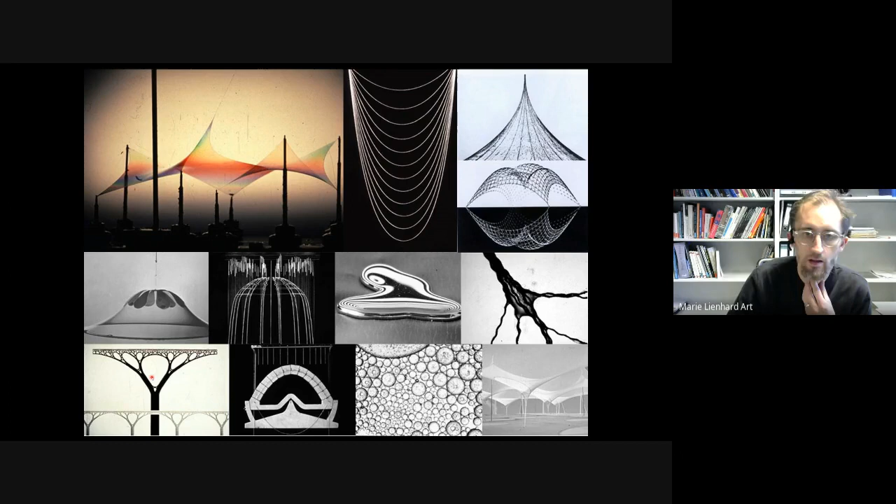And then the fourth subject is that of shells, and then predominantly grid shells, which they were studying. And that's, I guess, something that you guys will be looking at quite intensely. So I will actually also talk about these four fields. I will talk a little bit about membrane structures, pneumatic systems, the branch systems, and at the end, I will keep it quite short with an outlook into the grid shells, because I guess there you have much better experts than myself at hand with Enrique, so I don't need to talk too much about that.

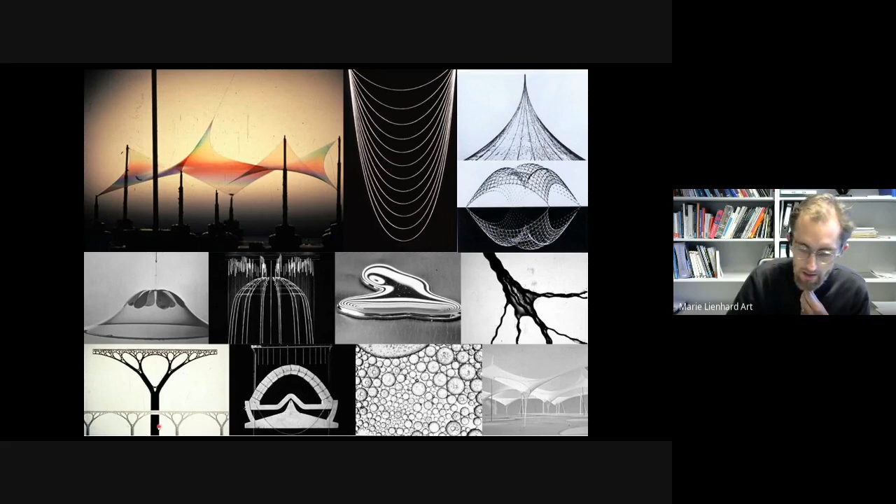So let's look into membrane structures. When you see the image of Montreal, of that World Exhibition Pavilion, or when you see the Olympic Stadium of Munich, a lot of people said, oh, they were probably looking into nature and then translated, for example, spider nets into something architectural. And to Frei Otto, it was always very important to point out that they didn't actually mimic spider nets, but it's because they built Montreal and Munich that biologists approached them and said, you seem to have a very good understanding about these kind of systems. Can you explain to us how spider webs work?

So there's this obvious link. You look at these systems and then you look at an image of Montreal and you think, wow, they've just built a spider web. But this system that they built in Montreal and these cable nets came out of a totally different idea, and it just happened to look similar. And when you look at it in a bit more detail, you also realize that in the way these spider webs are built, they are actually quite different to these cable nets. But there seems to be this link.

Because the spider web is also a pre-stressed system that's tensioned under its own weight or pre-stressed during construction when the spider is making the web, and it's hanging under dead load and turning into a kind of surface structure, you see some properties of this net which we recognize from tensile membrane structures. You see this double curvature. You see that it's becoming a lot more dense around these local points, something to do with the concentration of forces. And I guess through trial and error and too many meshes breaking, the spiders have learned to make their nets a little bit more dense around these areas.

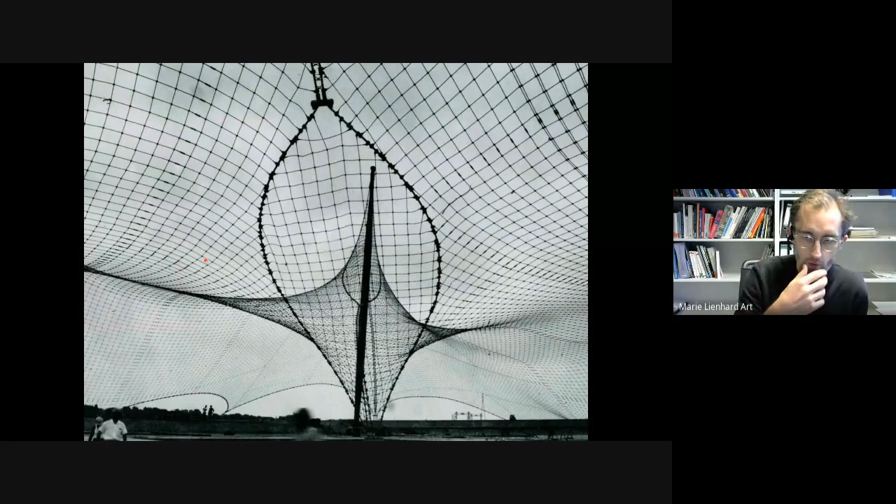And it was actually in this dialogue that they started then working more and more with people from other disciplines. And in later large research projects, they got funding for architects, engineers, and biologists. So they could work in this world of biomimicry or bionics and actually address their work at these translations between natural phenomena, which you find in plants and animals, and then translating that into something technical.

Now, if you look at textiles as a material that we can use to build envelopes, you could say, well, we have a thousands of years old history. Some of that history of building these tents has lasted until very recently, which you find in North America and North Europe. And some of it we can date back to the time when most of the people on our planet were nomads, and then they would build these very light systems.

Where in that case, they would take a structure out of timber, just cross-connecting something they could find anywhere in nature, and then cladding it with textiles. In the beginning, that would have been animal skins, and later it would develop into woven textiles.

And we see in other regions of this world that the primary structure, so the timber that they need to build these, would become more rare. So in the northern tundra or in areas in the northern European or North American forests, you would have timber as an almost endless resource. Whereas in the more desert areas in North Africa, timber is actually something that's very scarce.

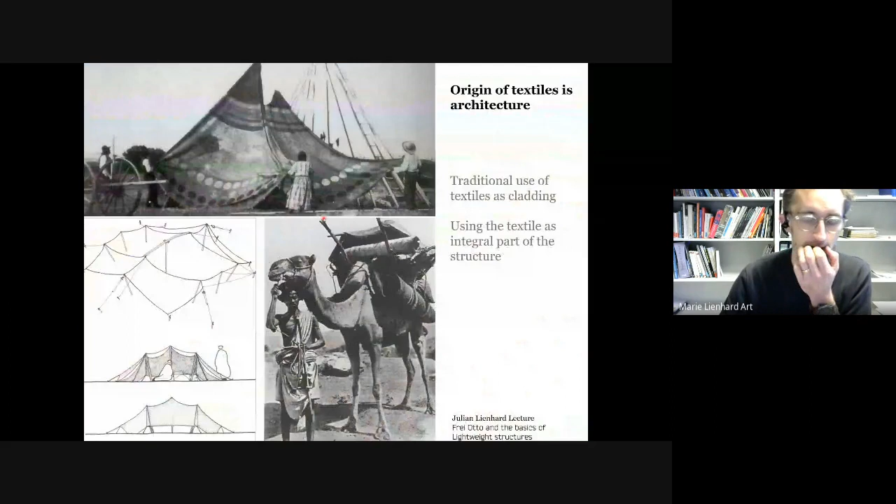And immediately you also see in these drawings that we see some curvature appearing on the surface. So the people making these drawings, they were not architects or engineers trying to explain something about curvature, but you also see it in this image just through observation. When they start tensioning these skins, then there's some curvature that appears. And this is actually a very central part, and this is kind of the first observation that then leads to the work of Frei Otto and this idea of building something structural out of a textile material.

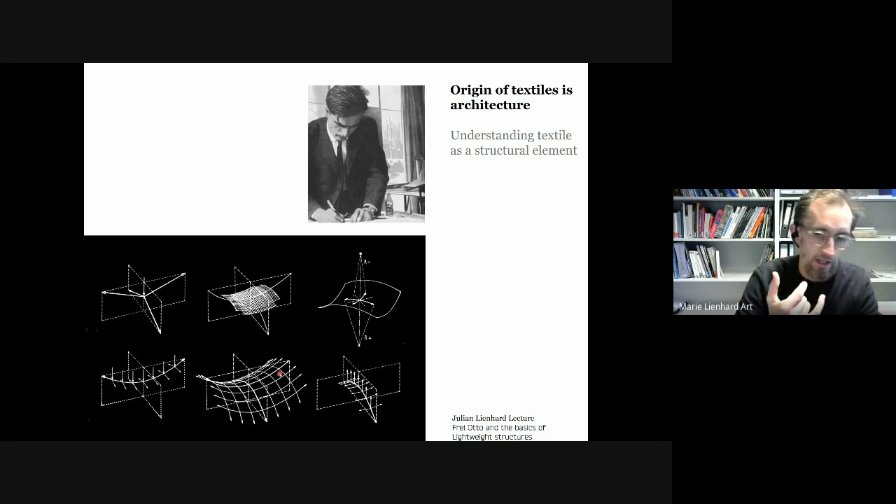And we will actually now just take a few minutes to focus in on this a little bit more, because, as Enrique said, it's these very simple and basic pieces of understanding about forces and form which totally open up a world for you to understand how you can design creatively with these kind of systems. So I'll be looking into these graphics in a bit more detail.

Before then, I want to just put in from the side, and early on I could only find the German graph to it, but I'll quickly translate it for you. I put in from the side something that was historically super important. And that is that at the same time as Frei Otto was developing this understanding about how tensile membrane structures could work, or how tensile systems work themselves, the petrochemical industry at that time was developing new materials.

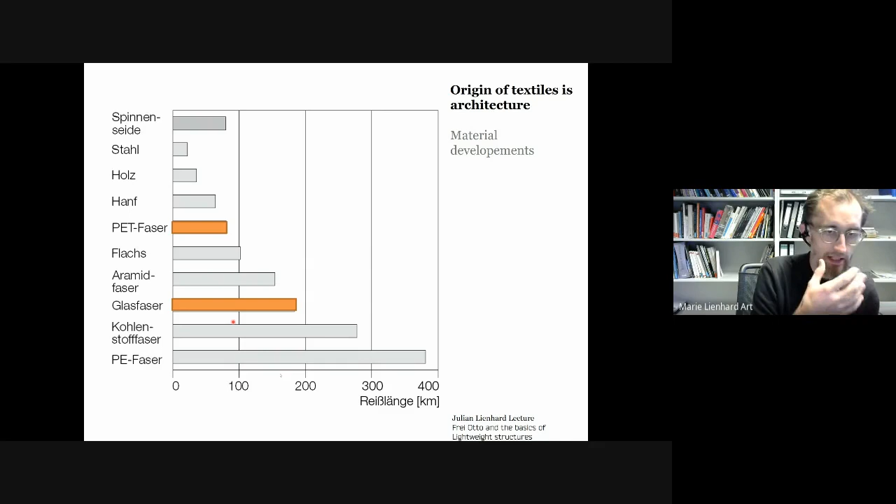And in the beginning, we know the early explorations of Frei Otto, the membranes were predominantly built out of cotton, and then some mixed cotton and PET fibers. And there, the strength of the material is very limited. And it's only because of PET being developed further and then eventually glass fibers as a material that he could source as a membrane material, that he could suddenly get into this world of these large span tensile structures. Without this material development, which just coincidentally happened at the same time, it would have been impossible to push the boundary in the way he did.

And he himself developed a lot of ways of looking at material and their properties. And the one thing that was first suggested at the IL is the so-called rip length. And with this rip length, they were studying materials, and they were always putting the weight of the material against the strength.

So you have a material that has a weight. I'm just going to take my pen here. You could say you have a weight of a material that's given with, for example, take timber, maybe 5 kilonewton per cubic meter. And then timber would maybe have a strength, just as a normal typical timber that you could buy, that's not a high-ranking glulam, it would maybe be 1.5 kilonewton per square centimeter.

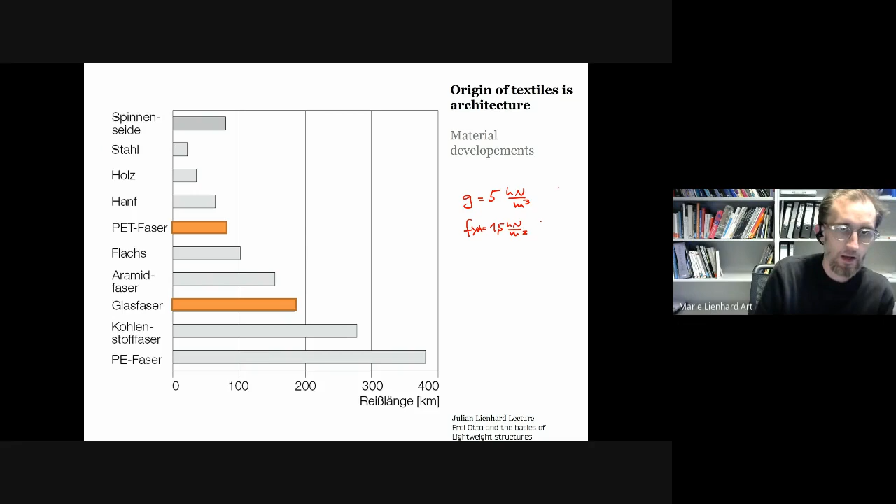And now if you compare these two numbers about how strong is it and how much does it weigh, you can just imagine an endlessly high tower, and then you hang a steel fiber on that tower, and you hang a timber fiber on that tower, and then you hang different kinds of fibers on that tower. And then you actually see that steel has a shorter rip length than timber, for example. Even though steel is 10 times stronger, it's also 100 times more heavy.

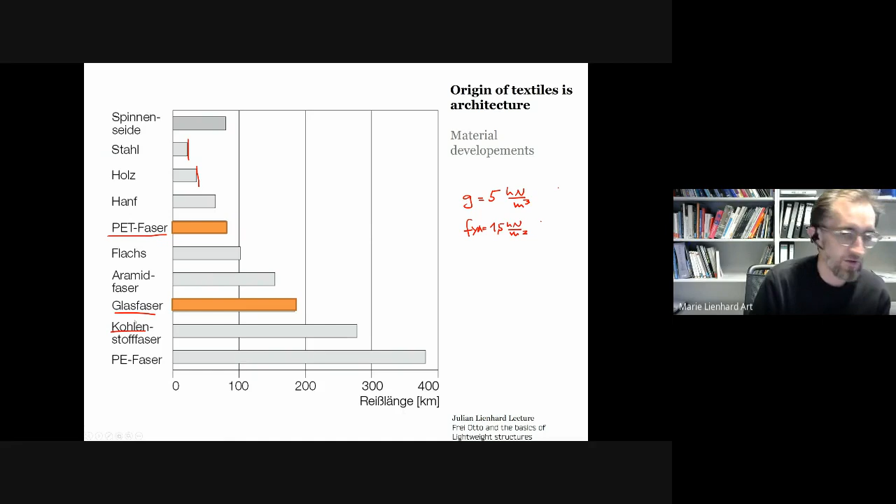So in that case, it would then rip much sooner. And then you can see that there's some materials like the PET fiber, they combine high strength and low weight. And especially then if you go, this would be carbon fiber and glass fiber, there you suddenly have a material in hand which is super light and has an extremely high tensile strength. And this is essential because if you look at a membrane, you need to combine a lot of properties. So you can even start thinking about building something out of a textile that spans over 20, 30 meters.

So now we talked about we need a high strength. We need a high elongation at rupture. So carbon fibers, they almost have no stretch and then they suddenly break. Whereas glass fibers and PET fibers, they have a bit of stretch in them before they break. And it was also an important property, just like if you have a stretch shirt that you're wearing, that if they would build these membranes, they would produce them too small so they can stretch them into shape, and that gives them their stability. So fibers that are super stiff also wouldn't have worked.

And then it really comes down to these two fibers which can be used because they combine high strength, low weight, also with a low stiffness. And then there's actually very few materials left that have a very high strength and a very low stiffness. And in that, you then get enough stretch out of the material so you can really pre-stress it.

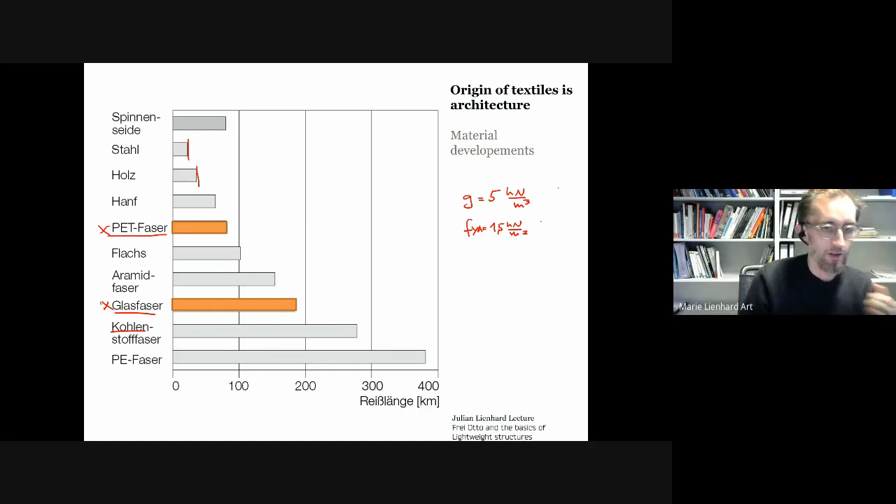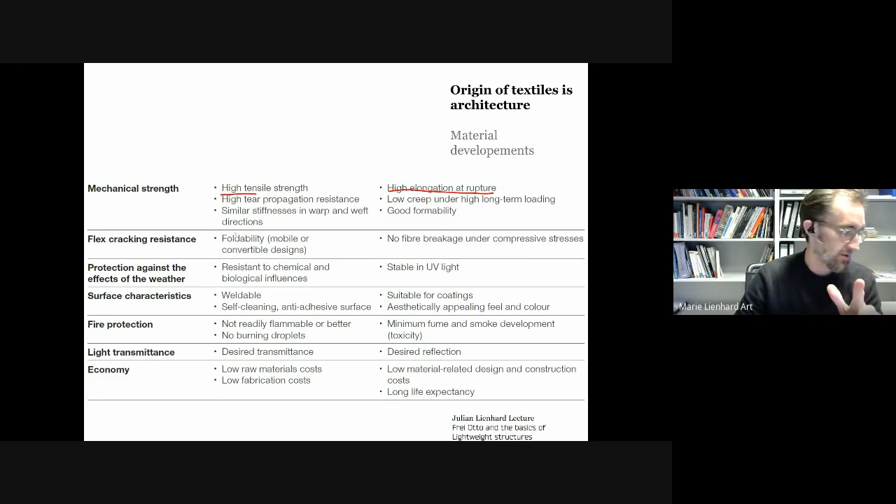Of course, UV stability is important, resistance against water. Fire protection has to be considered. It at least mustn't melt and drip down as kind of molten plastic on the people. So then there's a lot of other properties which also X out a lot of the other material options. And so you can see that actually out of the abundance of material developments that are always happening, still to today, there's only two, three fibers which are left, which we can use for these applications.

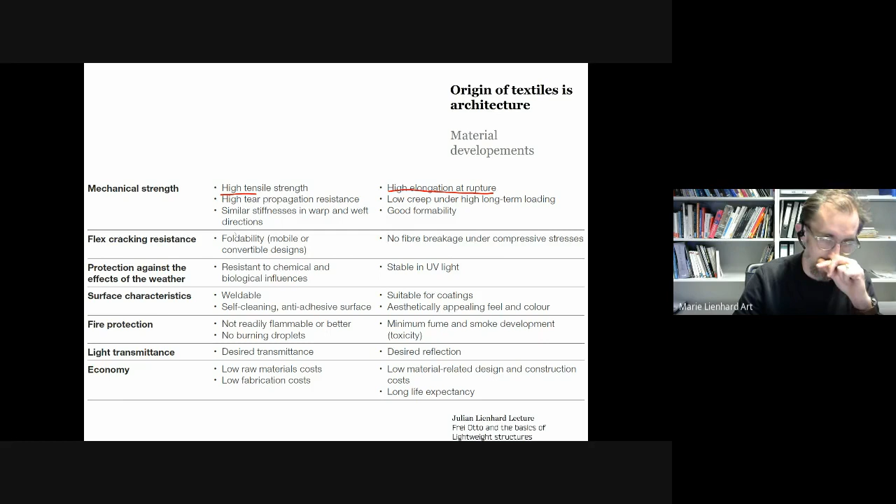And they were all three of them, PET, glass fiber, and then PTFE. Those three fibers were predominantly developed just at the time in the 60s, 70s, when Frei Otto was starting to build these roofs. So that's kind of the small sidekick, that it's not only him pushing the agenda, but it's also coinciding with the material developments that the petrochemical industry were doing at the time.

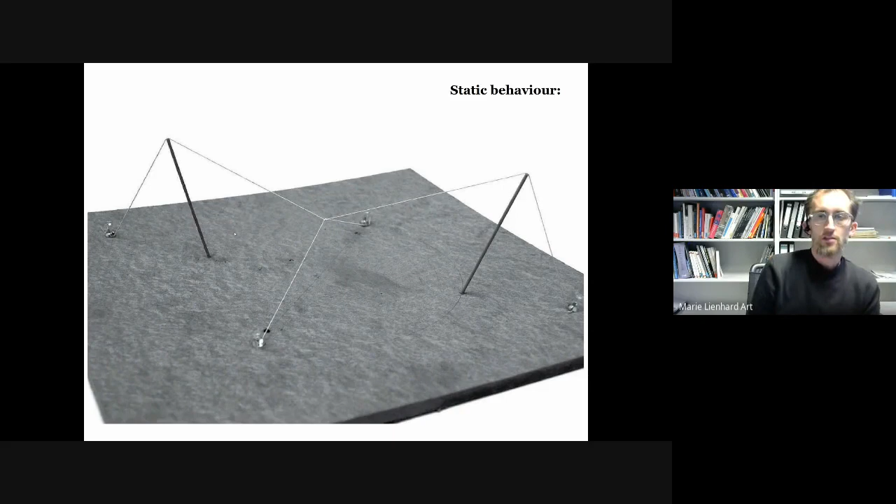So now let's go back and look at this principle in the way Frei Otto explains how forces work in this system. And he explained it in a very simple model. You saw the drawings earlier on where he said, I can take two fibers that are crossing each other. You could imagine in his sail that he was building a really large membrane roof. And you have the two crossing directions inside it. And you could focus into it and say, I'm building a model just of two fibers crossing each other within my membrane structures.

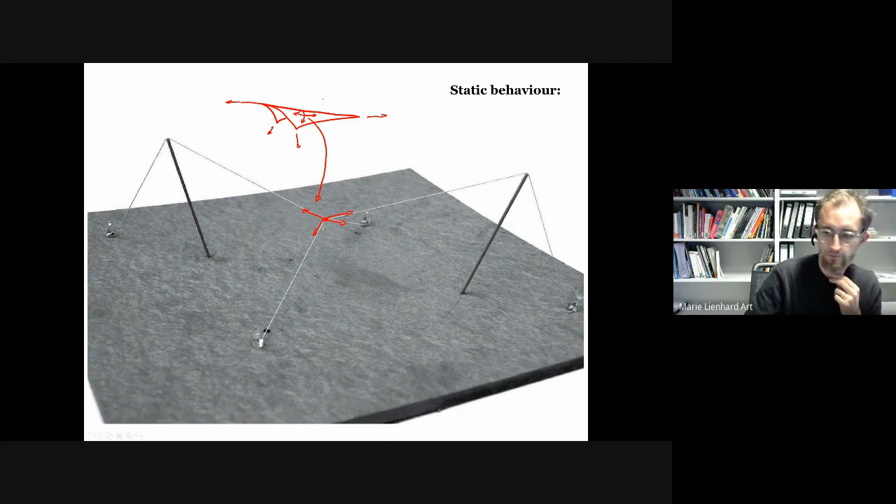Or if you want to imagine it a bit larger, this could be a cable net, for example. And as I'm tensioning this net or this membrane from the four corners, I'm putting tension into the surface. And now I want to observe what's happening inside the surface. So you could build a model just by hanging a string, crossing it with another string. And then you can observe that you can pull down and you can pull up. And there's always one of the strings which becomes active as you pull on it. And it's because of this crossing string behavior that we actually now have a structural system built out of materials that can only take tension forces, yet it's stable against loads from any kind of directions.

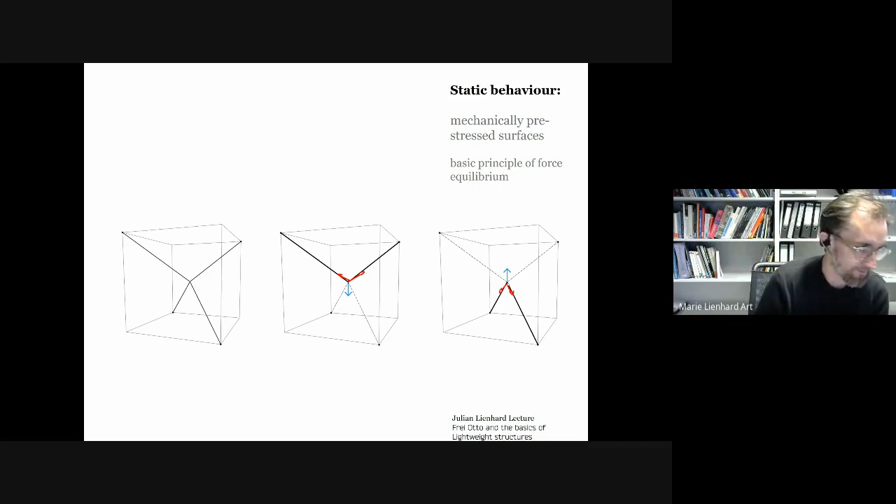And as you see it now, I'm sure for most of you, it should be super logical when you explain it like this. And this was actually the great talent that they had, that they could really break it down into super simple, very physical explanations. And then when you understand this, you can scale back out into the complex systems, and you always have that in the back of your head. We could focus into it a little bit more and now look at the way you can explain the same thing through graphic statics.

I'm sure I have a kind of mix of architects and maybe some engineers. Maybe some of you have never heard about graphic statics. Maybe others had to go through it in university for many semesters. So I'll try and explain it very simply. For some of you, it may be a bit fast. For others, it may be a bit slow. So let's just take a second and really understand what they were proposing here.

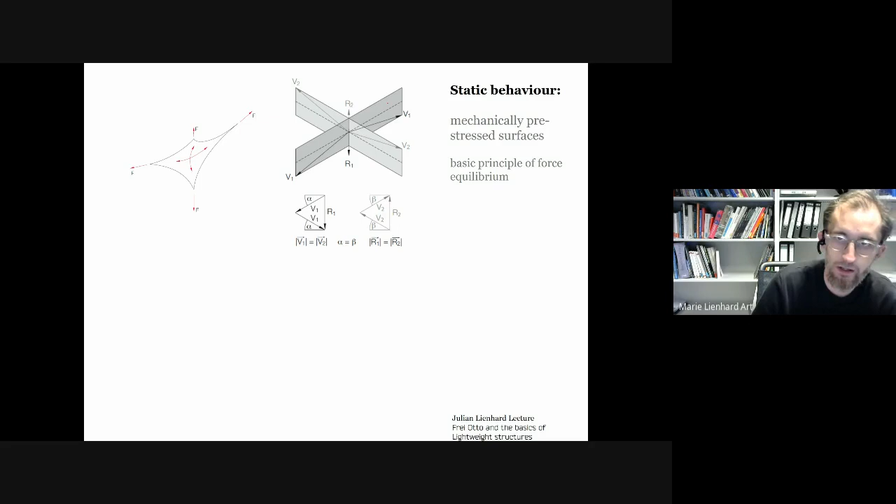So we again have these crossing fibers of the membrane. And what I'm doing here now, I'm putting these two gray surfaces in it so you can just read it a little bit better. So really, these are the two fibers that are crossing each other. There's one which we call the standing fiber. That's the one I was just drawing. And then there's the hanging fiber, which is this one.

And then you can say in any system, we have equilibrium if the addition of all the forces that you can write into the system add up to zero. That's Newton's third axiom, that actio equals reactio, so that all the forces on the system outbalance each other. And in graphic statics, what you can do is you can find the resultant force of force vectors.

And so the theory that we need to find now is that the reaction force pulling up from this one cable, maybe I'll actually quickly change the color so it just becomes a little bit clearer, against the other force pulling down, that these two forces, if we add them up, need to add up to zero. And this you can do by just checking if you look at the force as a vector.

So we now look at the force inside that cable or inside that fiber within the membrane, we can draw it. The direction of this arrow is given by that angle, and the length of that arrow is given by the force. Then we take these two forces and we add them. In graphic statics, you always add the forces head to tail, and then you can close the force diagram, and that's what gives you the resultant force. Then you do the same in the other direction.

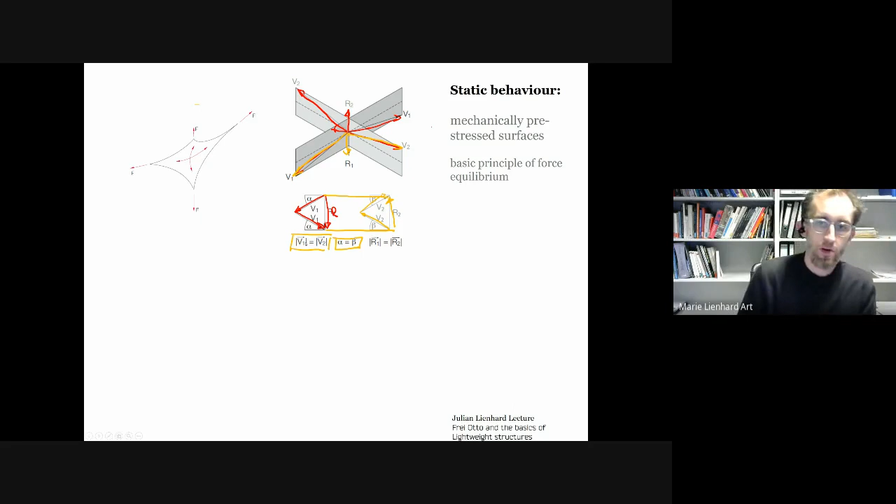And if you look carefully at this drawing, this was only true because I was drawing it in a way that the lengths of the vectors 1 and 2 were the same, and the angles at which I was drawing it were also the same. So now you could ask yourself, what would actually happen if I pull on the one string a bit more than I pull on the other? I guess I could still find equilibrium. And this is what this next drawing would show you.

You now say, well, right now I want to pull more in the direction of the vector v2. Well, I'm just going to switch to the laser pointer. Might make it a bit easier. So now I'm pulling harder on this string in the v2 direction than I'm pulling in the v1 direction. And because I'm pulling harder on it, I can represent this by an arrow which I draw longer. Because in graphic statics, the length of the vector represents the force.

And then through observation, I could build this out of rubber bands, and I would immediately see, all right, this point has also moved up. That's what we would intuitively say anyway, right? If you have these two crossing fibers and we pull more in one direction, then obviously it would pull up higher.

And then if you put that back into graphic statics, now v1 is smaller than v2, but at the same time, we've changed the angle, so alpha is bigger than beta. And it's because of these two things changing at the same time that the two resultant vectors are still of the same size and in opposite direction. So we still have equilibrium.

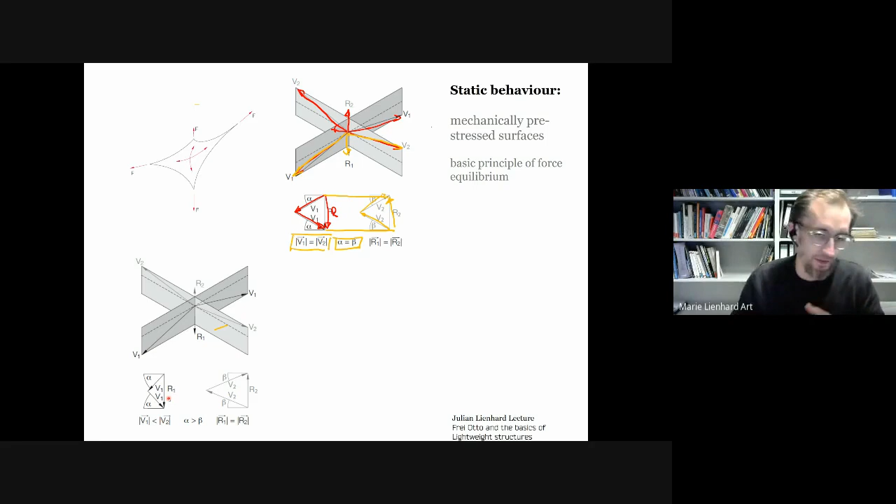And what I was just saying here is that geometry is connected to forces, and that I cannot change the one without the other. And if you can understand this, then you understand the entire work of what Frei Otto and the whole lightweight movement was heading for: they were looking at systems where, through change of the forces, you influence the geometry, and if you change the geometry, you will get an effect in the forces. And this is basically, in terms of graphic statics, with this super simple explanation, what's explained here.

And then finally, you can say, well, if I now have external loads, then you can also see that an external load would lead to a deformation of the system. That again would change the angles. And then the resultant vector R1 would reduce so much until F plus R1 again equal R2. So the resultant vector in the opposite direction catches not the entire force. So R2 doesn't have to stand against the entire force of F1, but R1, which points in the same direction, actually helps virtually carrying this load, which is kind of strange, right?

Because we just said in the system, it's always the hanging direction carrying the loads that are working vertically downwards, and it's the standing direction that carries the loads working vertically upwards. But in this graph, they could see that actually if I pre-tension the system, then into an element that can only take tension forces I can add some compression force, and it will carry that until it's lost its entire pre-stress.

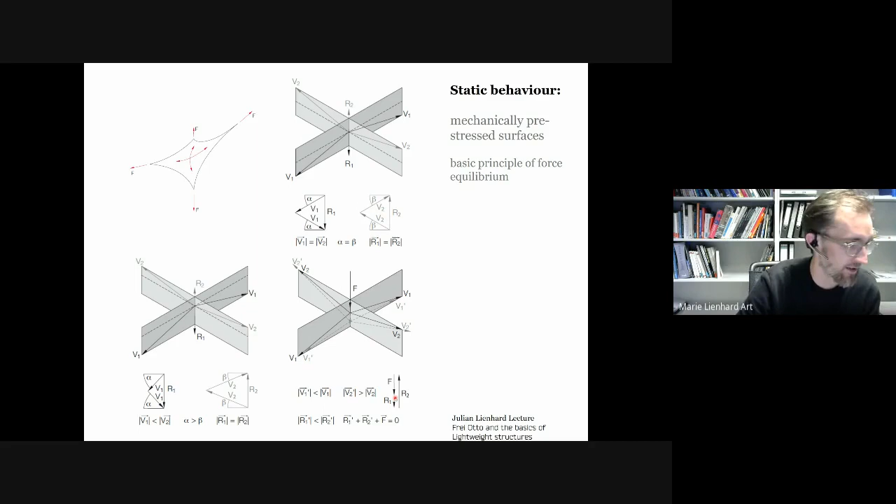So again, with just a basic argument, they could develop a theory around this to understand how pre-stress systems, by pre-tensioning them, would become stable against any external loads. And that's what's needed to explain why this would be standing. Now, this is why in 1955, Otto and his team could build this roof and be 100% sure that there can be any wind, any snow from any direction, and this thing will never fail.

Okay, so that's the first fun theory that I can share about Frei Otto, and that's kind of the starting point, how we got into this whole thing. If we just go back one, maybe here. So if we can understand this was his first theory, then we understand that we can build something that's structurally sound, so stable against external forces from any direction, out of a material that can only take tension. And we can see that force and geometry are inseparable in these systems. You cannot talk about force without talking about geometry.

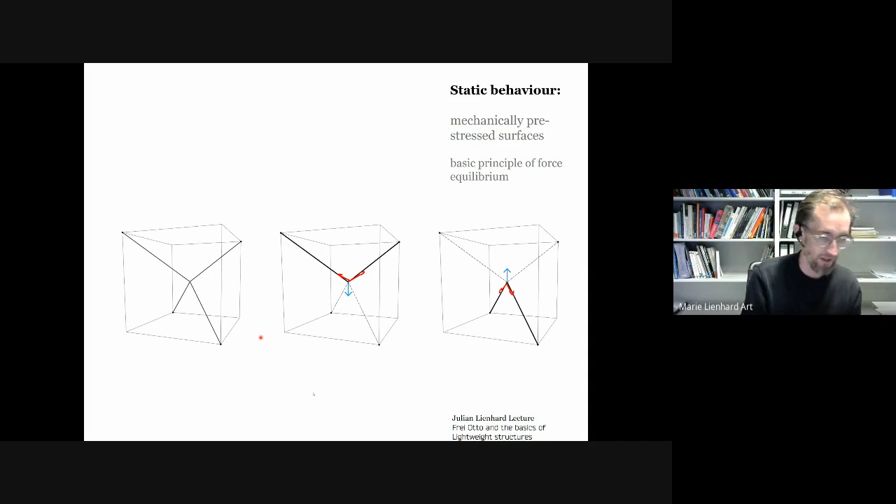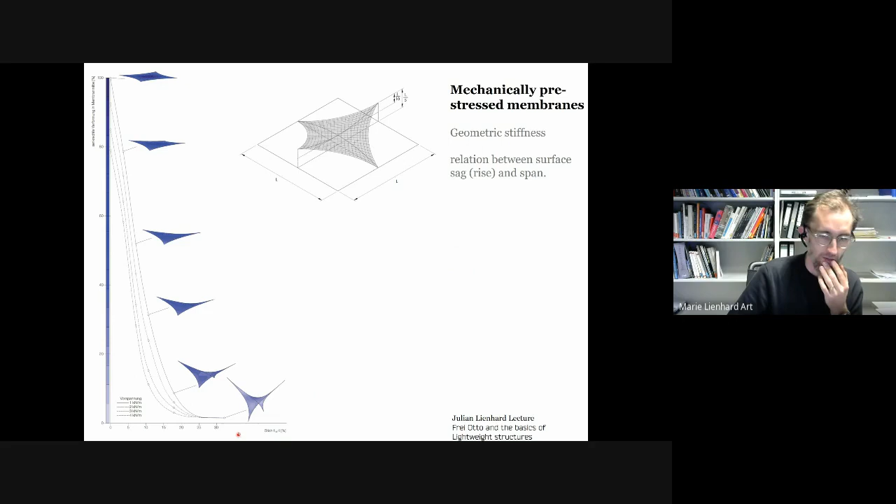I will jump over this, and basically these graphs, I will share this presentation later, they just talk about the importance of curvature and increasing curvature in these systems. If you have these two crossing fiber directions and you translate that back into the surface, we are then talking about double curvature. And then you can see how the double curvature influences the amount of deformation that you get in a system. So a totally flat sail, which you see at the top, would have 100% deformation. Then a highly double curved one would gradually reduce the deformation. And by this curve being nonlinear, you can also see that there's a kind of sweet spot in how much curvature you need to add into the system.

So with this theoretical understanding, they would apply that then to model building and try to develop shapes through these form finding models that they would build. And an important method to build these form finding models was that of using soap film. And that again is something that can be argued very logically, why you would use soap film to develop a membrane system. So just now we were talking about force equilibria.

And this is a totally different argument where they say, well, let's try and find a way of experimentally developing these surfaces. And the property of soap film is that it has a surface tension and thereby is self-contracting. As an image, you could always imagine it's always trying to be as thick as possible. So as it's contracting and gathering material to reach maximum thickness, it can do this only by minimizing the amount of surface area. You need to take this material from somewhere, right?

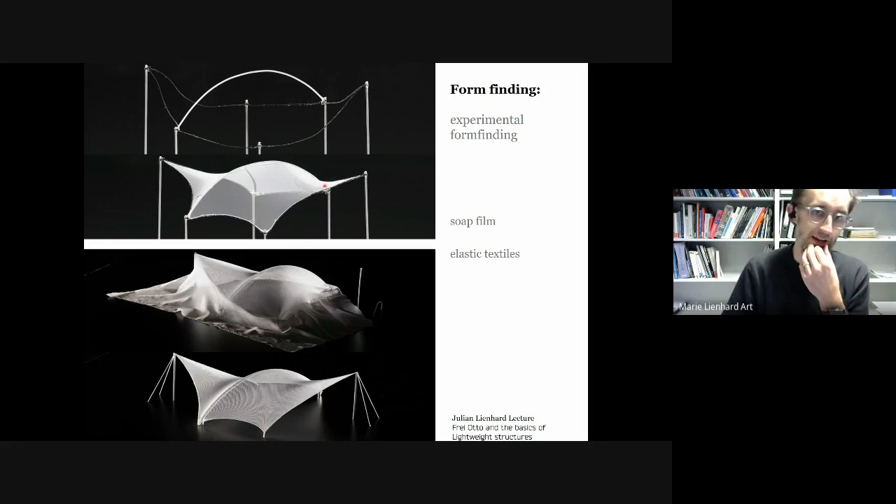So the argument is I'm using a material that's self-contracting, thereby maximizing its thickness and minimizing its surface area. The result, what we get, is that we form find the minimal surface. I'm sure that's something that you've heard. Minimal surface is basically just that surface with the smallest amount of surface area between the given boundary conditions.

So if this is my boundary condition of the arch, and then I have some edge cables, I could draw any surface in between here. I could draw some kind of shell surface. I could even draw something that's undulating or whatever you want. And all of these would be viable surfaces within these boundary conditions. And there's only one surface which has the minimum surface area.

And this is actually an excellent argument for a membrane structure for two reasons. First of all, the idea was to work with the least amount of material, lightweight structures. So we might as well build the smallest surface that we can build. Right? If there's a theory for it, that we can find the minimal surface, let's do that. That's the smallest amount of material that I can use to cover something.

But there's also a really good structural reason, and that's always something that Frei Otto would argue for. And that is that if I build the smallest possible surface, then any external load can only lead to tension. Because if you visualize that for a minute, any external load will obviously lead to some kind of deformation of the surface. And then that deformed surface is still one of the surfaces that you can describe between the boundary conditions. But there's only one minimal surface. So any other surface that gets generated through deformation must be bigger.

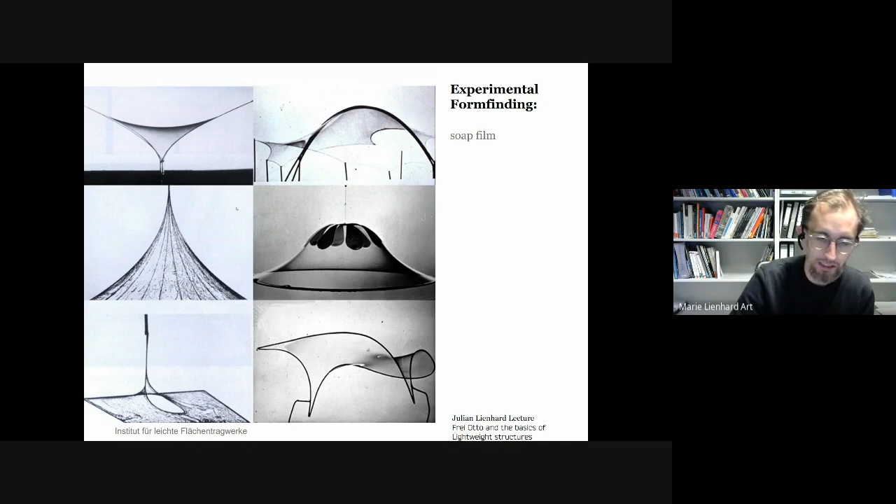And it's because of this that they then started building all these different model building tools so they could build surfaces out of soap film. They built this amazing machine. And inside this machine, they would build all these membrane structures, dip it in soap. There was a high humidity within this machine and a glass in front of which they could take photos of their membrane structures. And then they would measure the coordinates on these photos so they could then get a geometrical understanding that's reproducible of these kind of surfaces.

And still today, some of the form finding tools reference this and say it's the soap film method. And there's big debates in the industry whether that's actually the best membrane surface or not. There's some companies which say, well, these minimal surfaces, they have the property that they become very flat around the corners or in the center. And that's why it's maybe not such a good idea to build them.

But this comes from Frei Otto's philosophy, this comes out of the idea of finding the minimal. He would always only try and find ways to build these minimal surfaces, and then to control the geometry within these surfaces, he would add additional cables to it. These so-called ridge or valley cables. And then with these ridge or valley cables, he could then make the surface into smaller zones, and that would then again control against something being too flat.

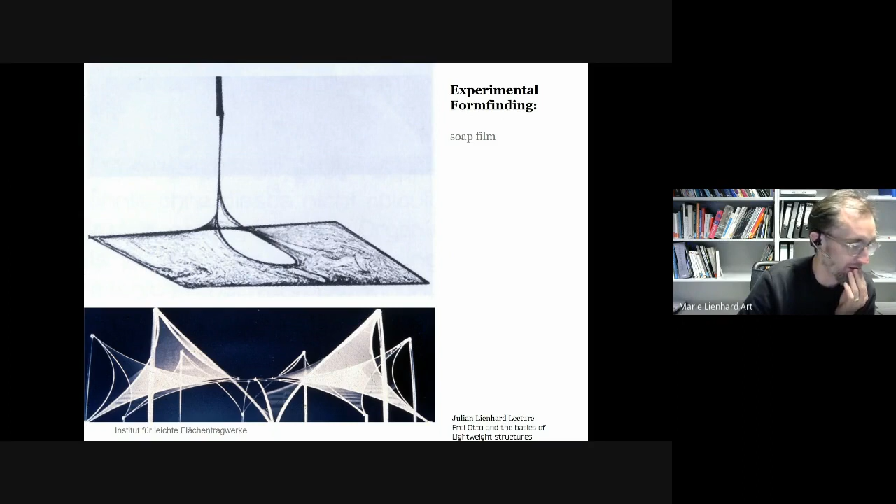And actually in the Stuttgart area, there's some offices which only work with this method. And then there's other offices which will never work with this method and always work with tension that differs in the two directions. And then they have big arguments at some of the conferences and try and find out what's better or what's worse. It's quite interesting that still today there seems to be a debate about it.

Quick excursion to the side. We talked about minimal surfaces. The property of a minimal surface is that the mean curvature is, if you measure it, that the radii are the same in the two opposite directions, which leads back to that argument. If the two radii are the same in opposite direction, then it leads back to the same argument as we were doing with graphic statics earlier on.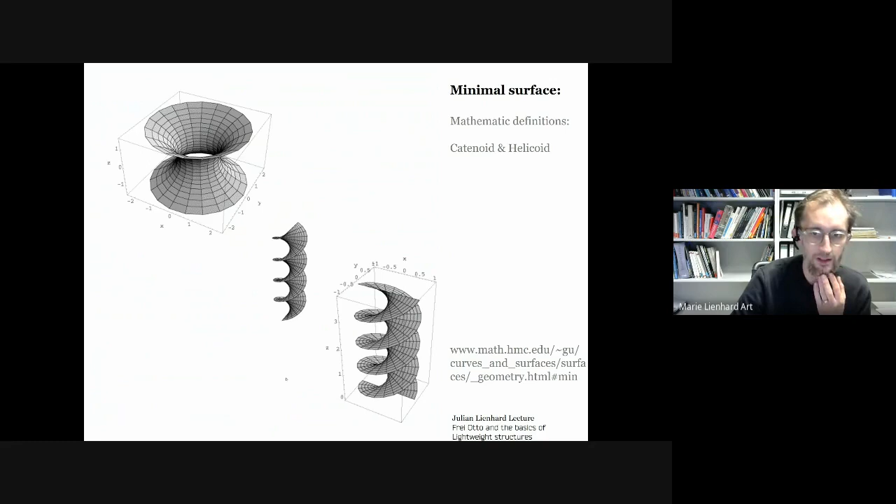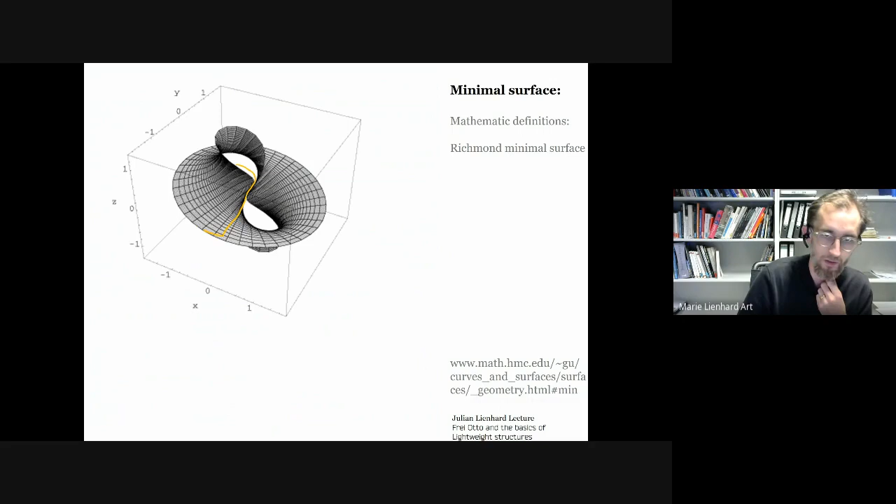And then you can look at mathematical minimal surfaces. So when you guys are developing your own designs, sometimes it's quite good to look at these math home pages and see what kind of definitions there are of these amazing minimal surfaces. And then you can either try and mimic this or build this as a sculpture, or you can see that you can actually build a section of this as part of whatever you're trying to design, right? So there's kind of quite exciting surfaces that lie within that. They could just become a source of inspiration.

What they would do then is to always play between these physical models where they would tension textiles at a very certain model building strategy. And that is that usually you tension a large piece of textile over your entire model. Then you try and pull it up a bit so you equalize the tension in it. And only then you fix it around the edges, you add in the edge cables, and then at the very last step, you cut out the borders. It's the last thing that you do. With this method, they could very quickly build these kind of surfaces.

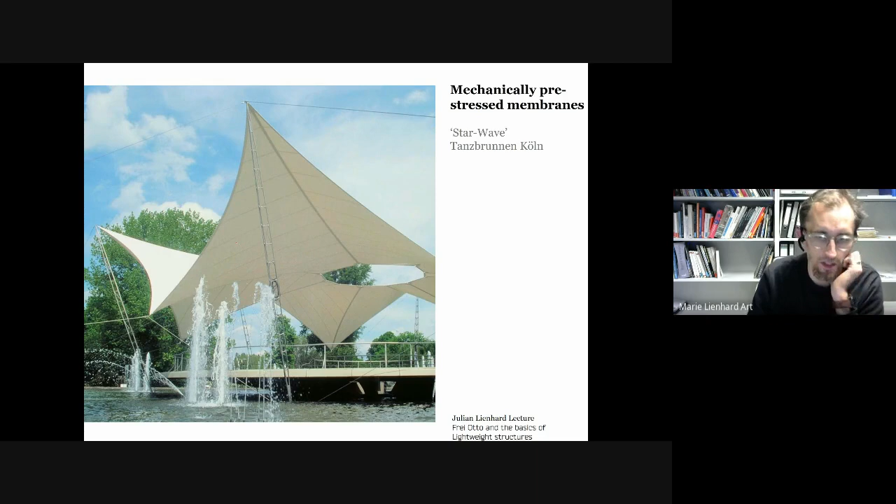And then the second type would be a ridge and valley cable structure. You can build sections of it or entire structures, and a large part of the form finding relies on the tension in these ridge or valley cables. That's how you can control the surface. Right? That's also another sample of a ridge and valley cable.

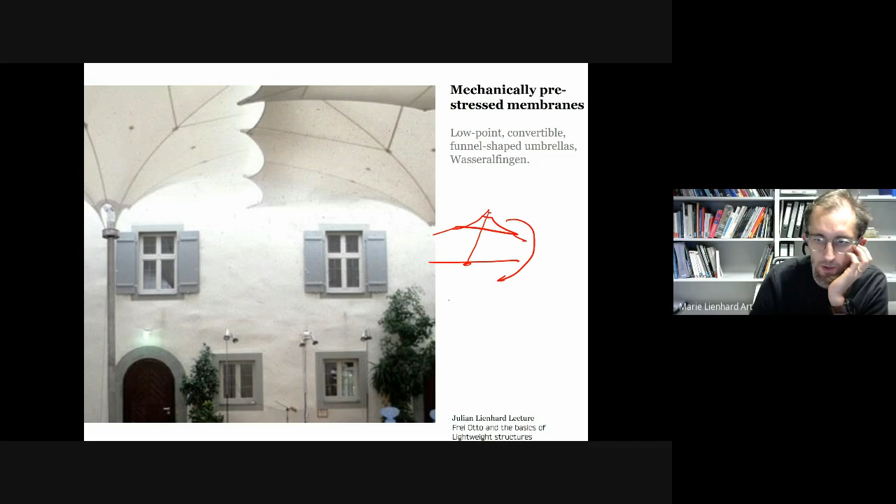Then you have this family of high points and low points, where if you take like a very standard membrane roof, you would build maybe something like this. You could put it on a mast, and then this would be your membrane roof. And then you can also invert that and say, well, I can also build an umbrella. That's just the same principle. I'm pulling 1 point out of the surface as a low point.

There's a second formula. If we now look back at these systems, then now we've understood a little bit about the surface, and we can have a very short excursion into understanding what's happening around the edges here. And there as well, in one of the IL books, they first proposed a formula which describes the relationship between the tension in the edge of a membrane. Where's my pen? There it is. So that would be the pre-stress of the membrane. And then you have a cable that's pulling on it to the side. That would be the cable force, and you can describe the curvature through a radius.

And then the basic formula is that if I have pre-stress with the units kilonewton per meter, and I have a radius with the units meter, and I'm trying to find out what's the edge cable force if I have a given pre-stress in the membrane and I have a given curvature, then you can write this very simple formula that kilonewton equals meter times kilonewton per meter. Then these two cancel out, and then you end up with this formula.

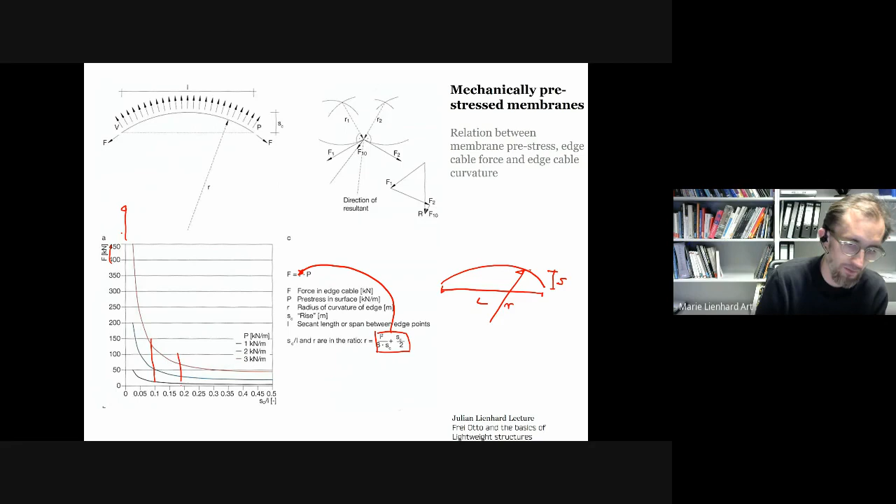And it's interesting to see that if I then put this into a plot, I can see obviously in a straight line, the forces are infinitely high. So this line never actually stops, it becomes a vertical line. And then down here, I can see that the force is not really reducing anymore. So at some point between 10 and 20% span and sag, in this kind of geometry, we have the optimum relationship between force and form.

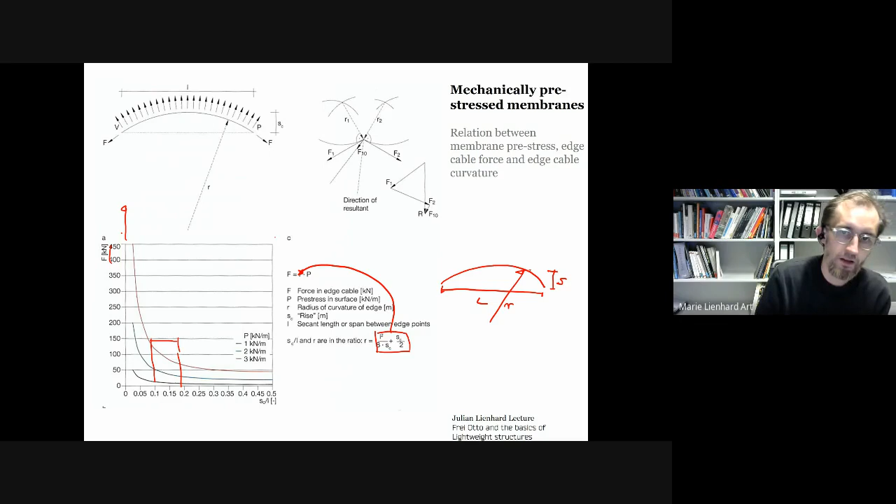That's why in most membrane form finding softwares, the presetting is that the edge cable has 10% sag. When you switch on these commercial form finding softwares, they will suggest this value. And the reason is the super simple formula, again, first suggested in one of the first IL books by Otto and his team, connecting that to some basic geometry and just saying, okay, if we plot these, then we find out these are the type of membrane structures that we should build.

And then if you have this basic understanding, the connection between radii and forces, you can also start playing with it. And this is something that we, for example, did around the teams of Frei Otto for these Medina umbrellas. First in the early 70s, these first funnel umbrellas were built in Cologne with Frei Otto. And if you build convertible umbrellas, you want them in this closed state to be as slender as possible.

And at the same time, we've just learned that if I now would build this umbrella with just 3 arms, and I have a span to sag ratio of 10%, then this entire area would not be shaded. And we've also learned that instead of that, making a straight line would lead to super high forces. So what we do is we break down the edge into more points where we can then have smaller radii. So we push into a higher shaded system.

And instead of then pulling back with each one of these points into the center, where I then need a lot of steel, and then this package here will become very thick, I instead use these so-called passive arms, which I'm connecting to the umbrella with hinges, and that just passively push out the edge. Now, this is only possible if the force that comes in from the membrane perfectly points in the direction of these arms.

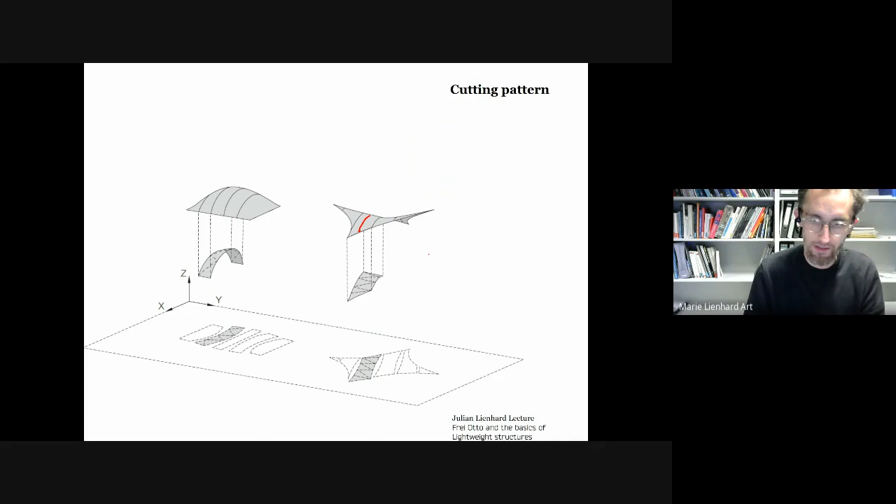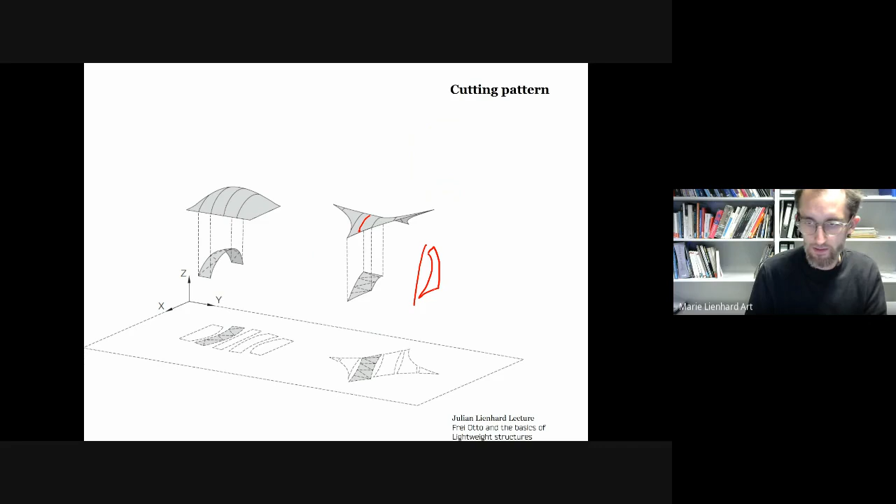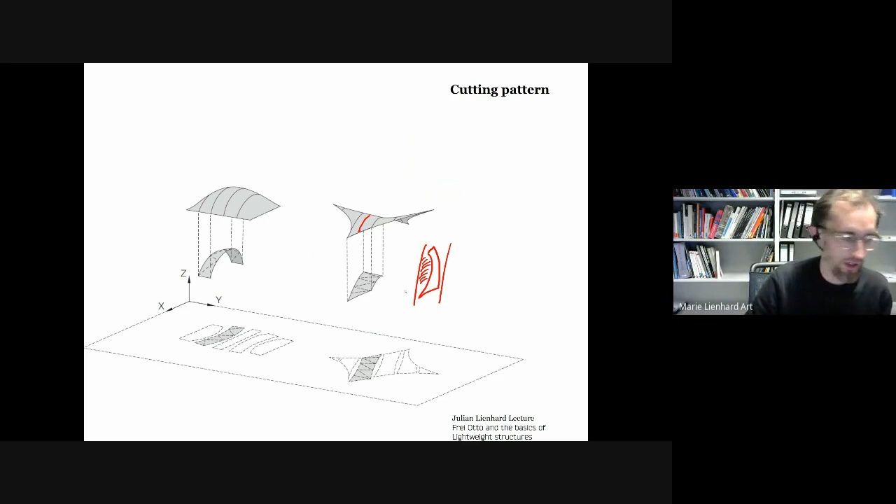Because any cutting pattern that you would just do with the Rhino command unroll, that you cut somehow out of the surface, would end up maybe being skew like this, and then you have a lot of material that you would cut away and waste. So also here, and this reappears in all the texts and all the experiments that they were doing, you always see that what they were trying to do is finding the minimal amount of material.

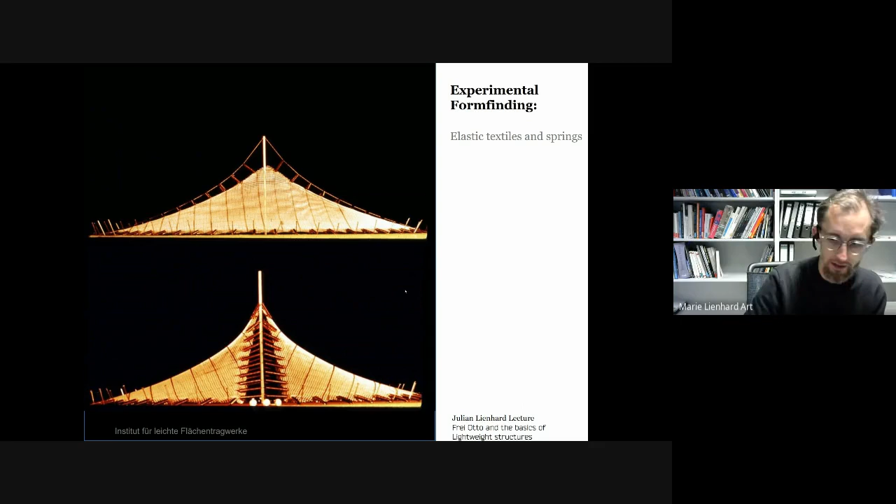In these models they were building, they would simply use rubber bands and stretch them across the surface, and then mark the areas across these rubber bands, and say, okay, these are our cutting lines. Because I know if I follow this line and I develop and unroll it, then I would end up with the minimum off-cut in the membranes. I wouldn't waste so much material. And so you find funny pictures of them trying to rationalize these complex 3D shapes into something that I could write down in 2D, right? That's something that we don't really have to do anymore today.

I will jump over this excursion into more cutting patterns and just say a few more words about pneumatic systems. So I was saying that there are these 3, 3.5 subjects: the tensile membrane structures, the branch systems and the shells. And the tensile membrane structures in Otto's books generally get divided into mechanically pre-stressed membranes, that's what we were looking at just now, and the pneumatically pre-stressed membranes, that's what we're looking at next.

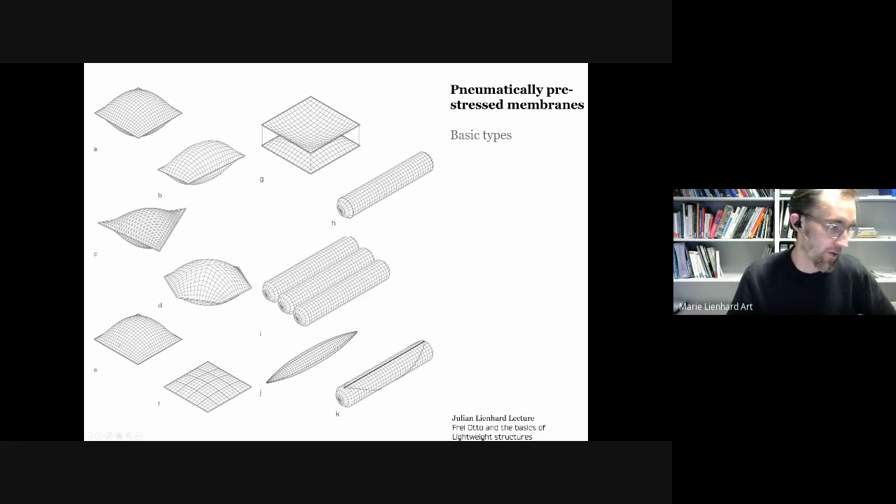These can be divided into some very basic families. This is what you know from your air mattress. You can build these air pressure compartments, add them side by side. You can build cushions that are fixated between edges, or you can build so-called air halls where you have a piece of membrane that's touching the ground and then you blow air into it.

And again, there's a very basic theory that goes with it through observation of, I'm just realizing that, oh no, something got missing, or has it moved back? No, indeed, I had some old images of Frei Otto's first experiments. We'll jump over them. We anyway are short for time.

So through their observations with all these soap bubbles, I would have been able to show you a few more soap bubble images of these first experiments. They saw that it would always tend to become a sphere. Whatever you do and put air pressure into it, it would have the tendency to become spherical.

And then the way that you can argue that this can carry external loads if you build a kind of cushion is that you have a high pressure inside this cushion, and these forces perpendicular on the surface lead to a tension within the surface. And if you now apply external load, then this gets passed through the air pressure onto the bottom membrane, and that's what actually carries the loads.

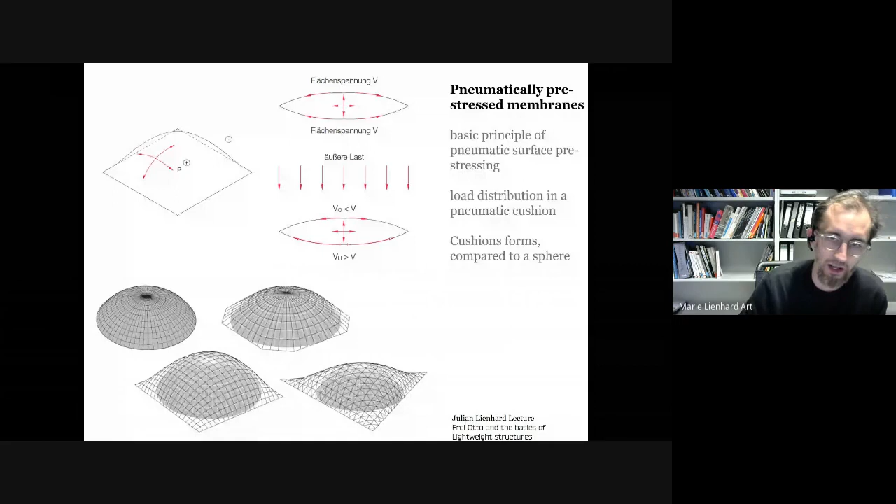So it's quite interesting for you to imagine that if you see the next ETFE structure and you see snow lying on it, then you need to imagine that the structural member that's carrying the snow is not the one that's touching the snow, right? Because the force gets passed through by air pressure onto this lower cushion, and that's what's actually carrying the weight.

And here again, they could derive this very basic formula of connecting force and geometry, just saying that the stress in one of these cushions is equal to 0.5 times the inner pressure times the radius. And again, you can draw this graph and say, if I have no curvature, so if I have a flat cushion and I try to pump it up with air, the stress in the membrane would be infinitely high. And if I then slowly blow up the bubble into the sphere, then the forces become smaller and smaller.

And again, in this relationship here, a sag to span ratio of about 10% is kind of an area where these systems operate quite economically. And then with that, you see all these modern and traditional structures that were being built in some cases.

So what I was just saying, a sag to span ratio leads to a certain force in a pillow. If I now rewrite the formula, which was that the stress in the membrane equals 0.5 times the radius times the inner pressure, then you actually see that the span of the system isn't part of this formula. Nowhere in here does it say how far this cushion spans.

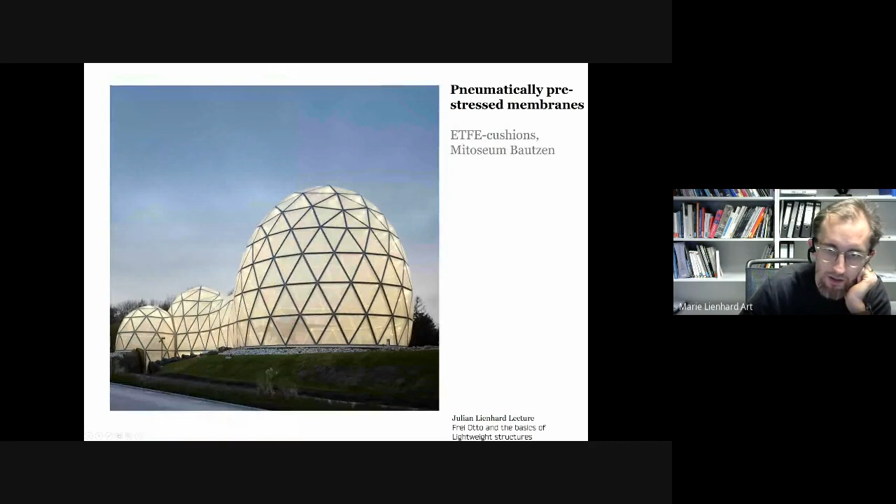And with membrane materials, this thing has a maximum span of 6 meters. And this one has a maximum span of, I think, 250 meters, something like that. Then you could imagine that if, with this formula, I can calculate the radius that I need to build this cushion, then in this case the maximum curvature that you can put into it would be a kind of half circle. And then still the radius would be over 100 meters.

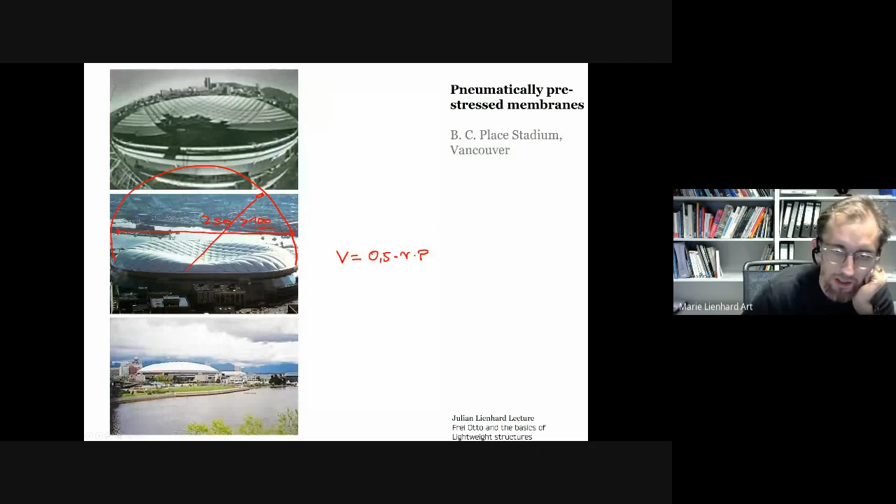Right? Whereas in this cushion, the radius that's defining the curvature here might only be like 10 meters. And now if you realize that the span actually isn't connected to the forces within the cushion, and we have a limited amount of membranes that we can build these with, then you could actually say, as of a certain span, I just simply cannot build these pneumatic systems anymore.

So what they had to do is they had to add cables, which can take a much higher tension. And then the curvature, which you can see on this lower image, would appear between the cables. And then you're back down to a radius around 10, 20 meters.

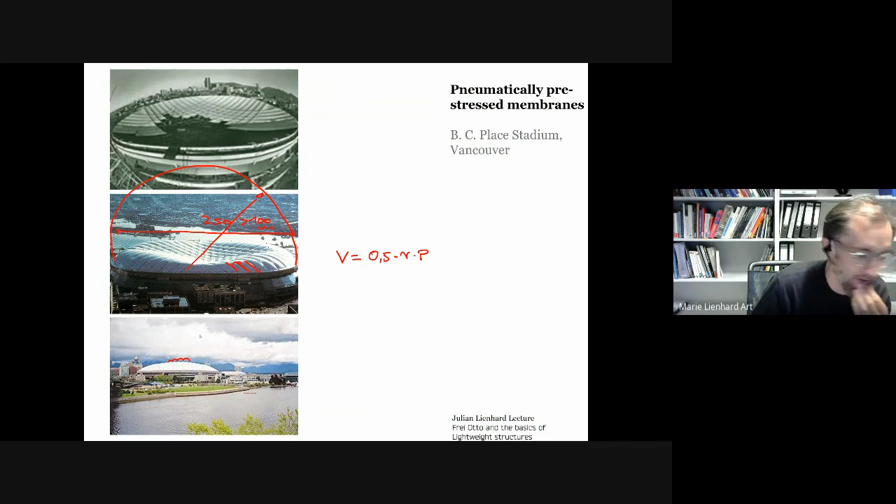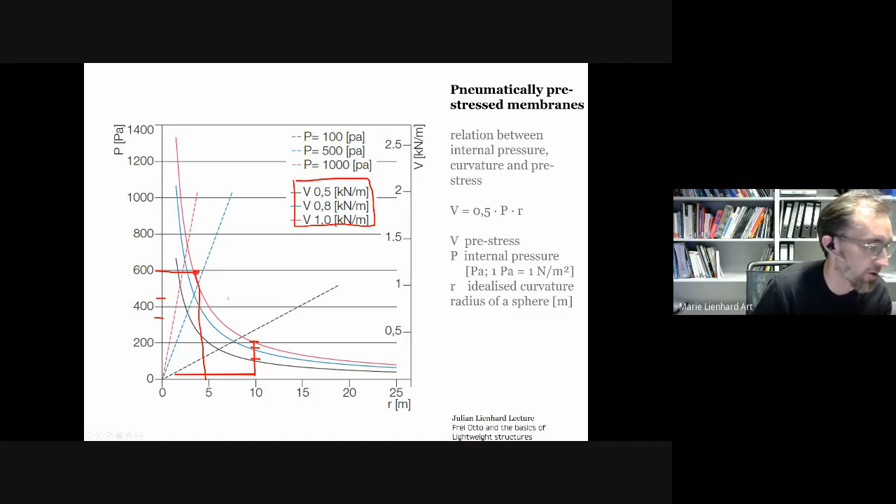So if there's 0.6 kilonewton per square meter snow on it, then you need to put so much pressure into the cushion so it outbalances the snow. If you have a material that cannot take more than 1 kilonewton per meter, then you can immediately say, okay, I can only build a cushion that has a radius of 5 meters. And then that totally defines the shape. So in these pneumatic systems, they would be much more limited in the shapes that are possible to build.

And this is why you then very quickly see in these mega stadiums that were predominantly built in North America, that quite soon they would add cables to support them. So a few more impressions, and then at the end I will now just look into branch structures and give a bit of an outlook into shells.

These branch structure systems, they were mainly following the idea, how can I collect forces from a large surface on a minimum load path through compression only. The idea is to avoid bending. Bending forces need more material to be carried than compression forces. And the idea of only using compression or tension would then lead to this idea of how can I catch the forces within a surface on a minimum load path with compression only.

And a lot of experiments were made, again, working with soap film, looking at these bifurcations between different surfaces and understanding what the angles are in this system, realizing that in these three-dimensional systems, they always end up having the same angle. And then also working with threads and weights being pulled onto them. So here simulating a surface load that's of the same magnitude.

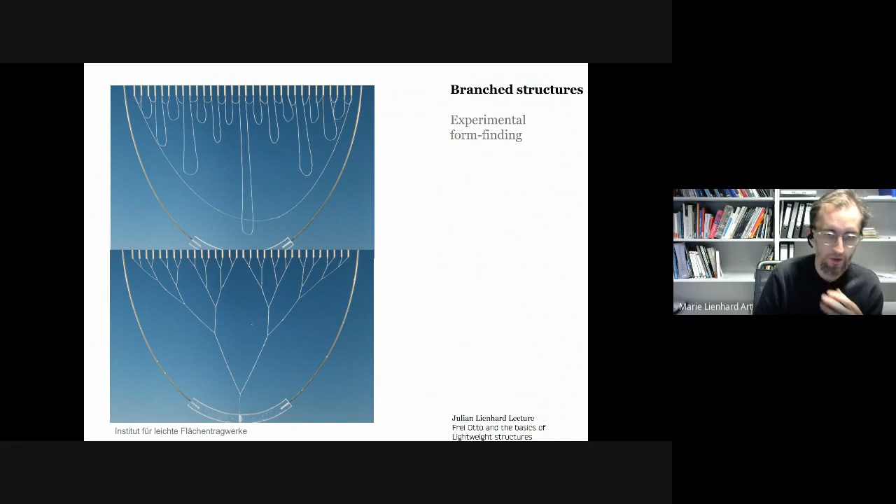If you turn that around, so first organizing the bifurcations, and then with these loops, you could then find this minimum load path. So a compression force from here would find on the shortest compression only path its way into the support.

There were a lot of studies then also dipping kind of chaotic assemblies of strings into soap, pulling them back out and studying these shapes, always trying to understand the relationship between these angles that would appear in these systems, and then developing from that a kind of shape grammar that you can build these systems with.

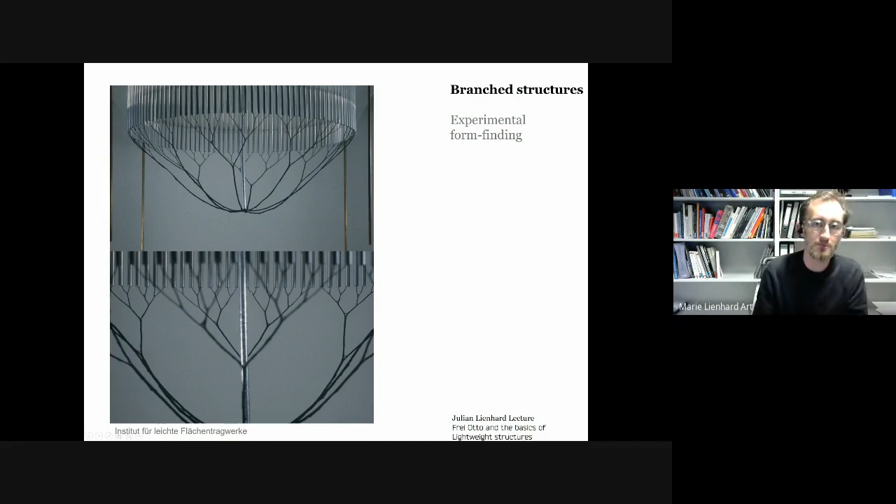And actually, because they're quite complex to realize, because these are totally three-dimensional systems, you only see very few realized structures. One of them is the airport in Stuttgart with cast nodes. They're cast out of steel, and then the individual tubes are being connected here. And then you can indeed see that at the top, the span of the roof between the points where it's connecting to this structure is always the same. So this span is nearly always the same. So you get a very, very optimally carried roof.

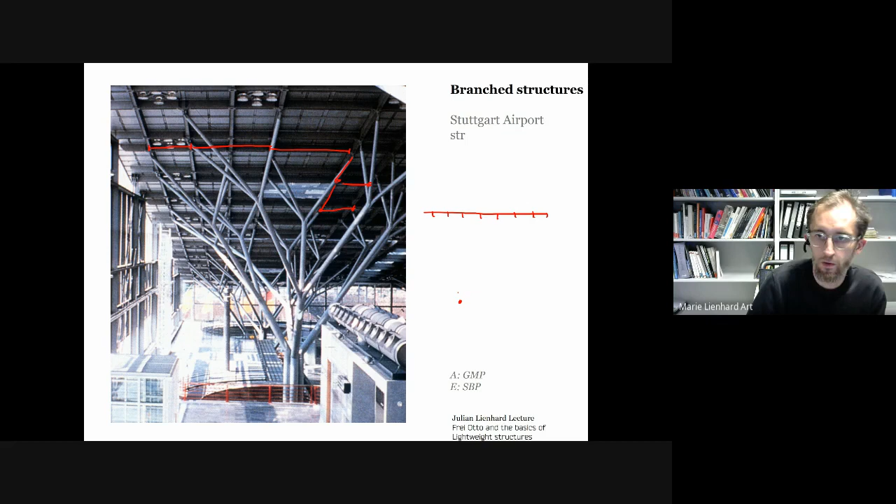Then if you say, so I have my entire roof and I'm splitting it into a series of secondary beams, and then I say I want all the forces to go down here, then they would kind of simply connect these forces with each other and then eventually lead them down into the ground. And then the next pillar would start here, and then this is how the system then develops.

Right, and today you can do that on a computer. An easy method with Kangaroo is that you can just say, you make a length goal, you connect all these lines, you try to minimize the length of these lines. And then you can say that in terms of forces, you have a ratio of 1, 2, 1, 2, and this is 1 and 1 and 2, 1 and 1 and 2. And then here we have 2 and 2 and 2. So here you have 6. So you can just always add up the forces that go into the system.

If you put these values into a form finding program in terms of pre-stress or length goals, then you end up with these shapes. And then you can vary them a little bit, whether they end up down here or here. You can play with these numbers a little bit. But that's the basic hierarchy principle that you can use for this type of form finding.

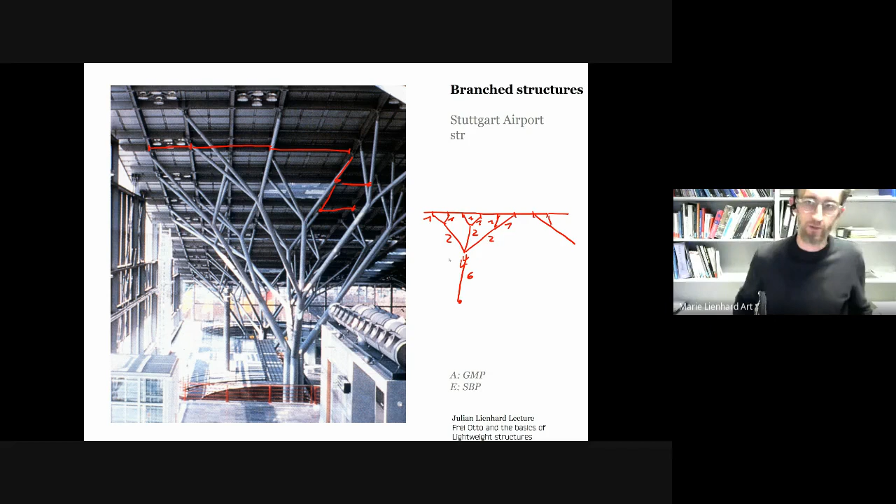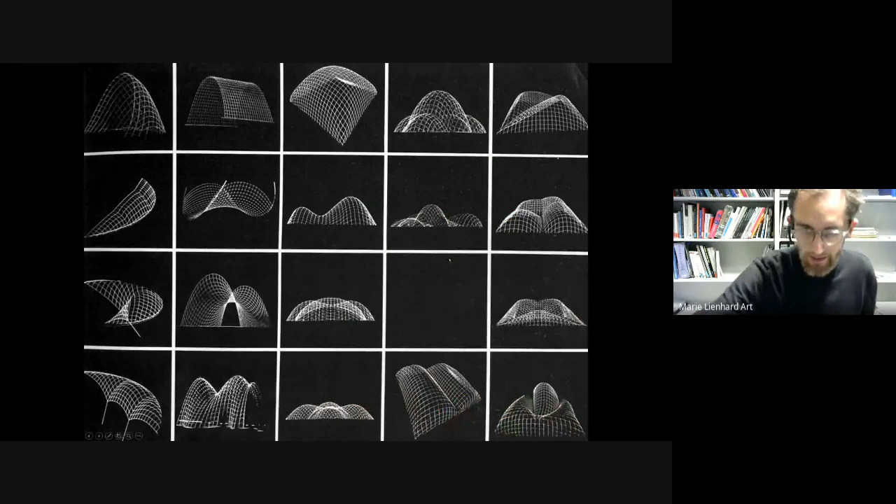Okay, and then at the end, a short look into grid shells. So the fourth subject that they were studying intensely at the IL. And what's quite interesting and what I always found super intriguing when I started working on my PhD is that they were built through elastic bending and they were form found with strings.

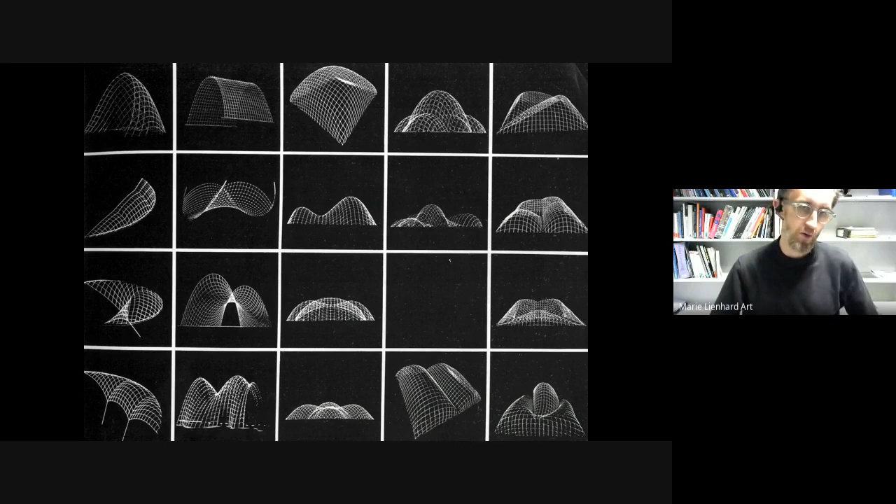So the form finding models were usually in the beginning always hanging chain models. And in the beginning of my PhD, I always argued, well, they probably didn't form find them through bending because back then they didn't have computers to calculate that. And then I studied that a little bit more, and I can show you a few insights into that.

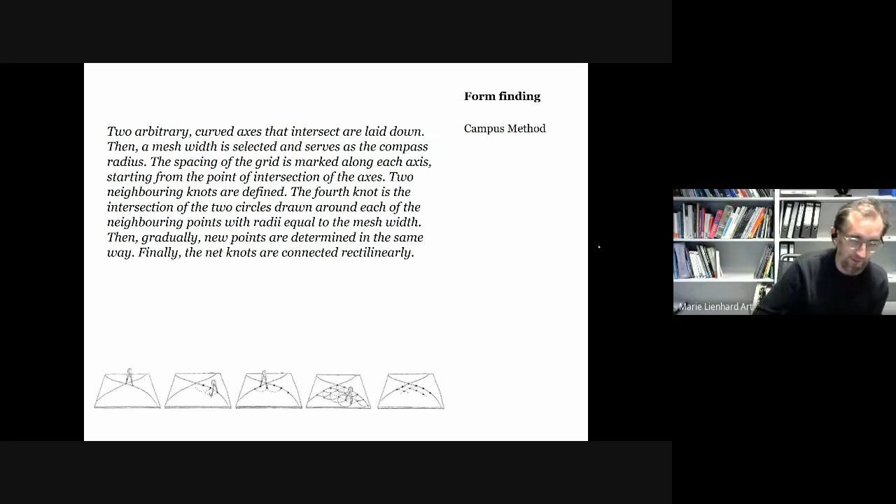Just saying again that the basic principle, what they were trying to do with these grid shells is that they would use, again, this idea of minimum. You can build a shell out of curved elements that you cut out of timber or where you bend steel, and then it's super energy intense and super material intense. But the cheapest building material is still a straight beam that can be transported really minimally, that can be produced really minimally. So they said, well, if force and form are so highly connected, can we find shapes where we can elastically deform our elements into something that becomes so stiff that we can build a structurally sound system out of it?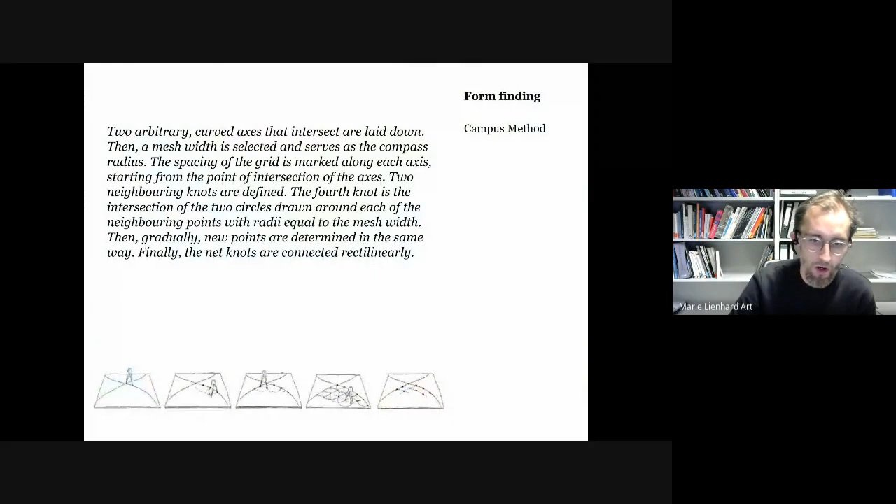And now if we're elastically deforming the grid, then we also need a grid that is developable. So you can put it flat on the ground, and then you can push it into the 3D shape. And the only thing that changes is the angle between the elements, right? So you can see that down here, it has a different angle to over here. Sorry, I'm just clicking instead of drawing. And the method that they found is that a grid that is developable, or a kinematic grid that you can open, that you can deform and that doesn't block itself, works if the distance between the two members that are opposite each other have the same length. That's an observation that you can make.

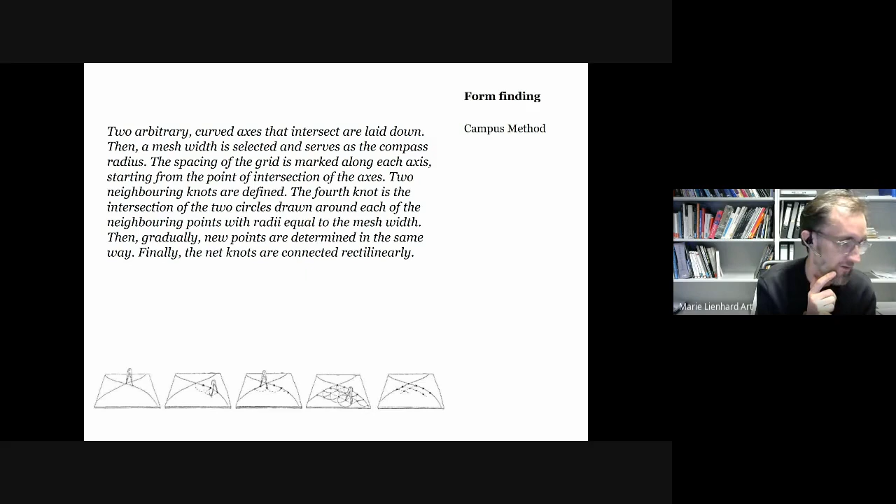Now, if you're flat, then it's quite easy to build. If you're on a 3D surface and you're trying to find that grid, which is developable, then you can just walk across the surface with a compass. You find the crossing points, and then that defines your grid. So you first have a surface, and then you back argue into the grid that you need to build the surface. So again, a super simple method that you can find just by arguing.

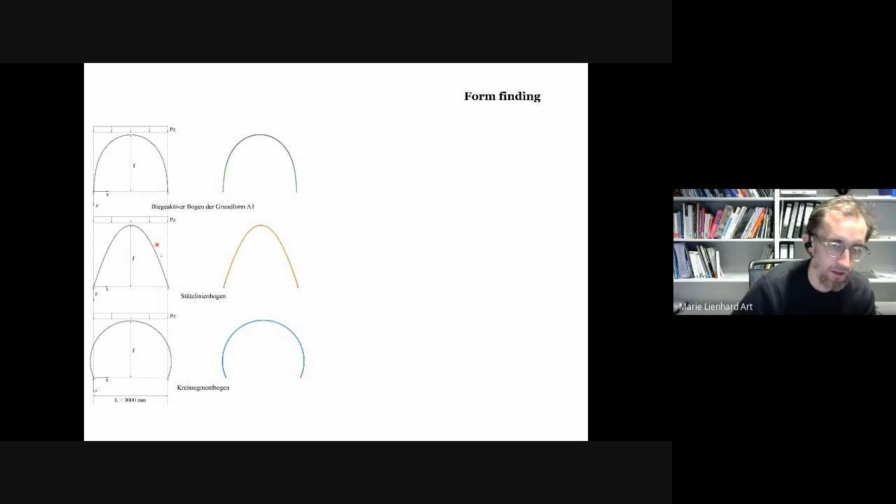Now, earlier on, I was saying that I was a bit confused when I first saw these grid shells, why they were using the hanging shape and not the bending shape. So this arch, which I'm drawing here at the top, is actually the result of bending a piece of wood. This arch, which you see below here, is the result of hanging a chain. And this here is a circle. So you can see that these three are totally different curves.

And what I did as a quick study, I compared a circle, a hanging chain, and an elastica, so the bending curve, to each other. And I was just varying the rise to span ratio so that I get all these different shapes. And then you can see that in the beginning, up to a rise to span ratio of about 10–15%, all three curves are almost matching.

And then only above 30%, you see a clear difference between red, the hanging chain model, and black, the bending, the elastica curve. And I realized this, and then I was like super happy, said, wow, I just found out this cool thing. I need to talk to these people. Maybe they didn't know about it.

And then this moment happens, which will happen to anyone in lightweight structures. You think you had an invention, and you talk to someone of the former IL people and they say, yeah, Otto has drawn this graph in book 16 on some of these pages. I'm sure some of you have seen these books.

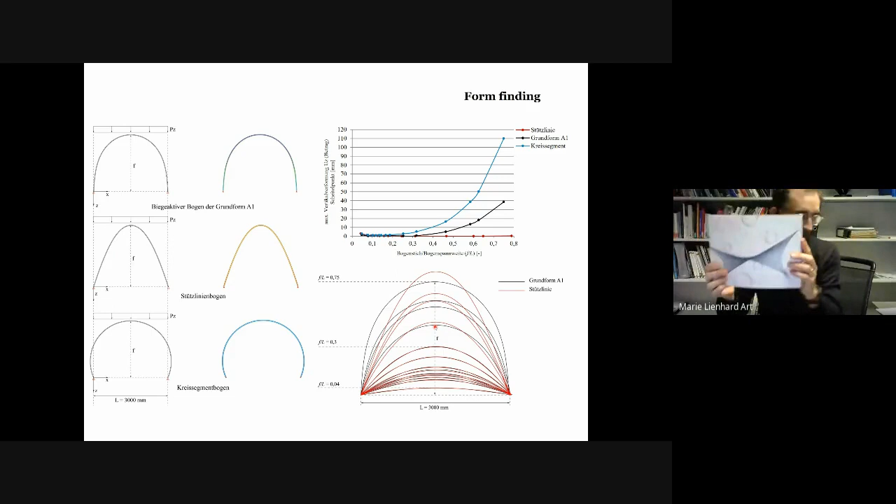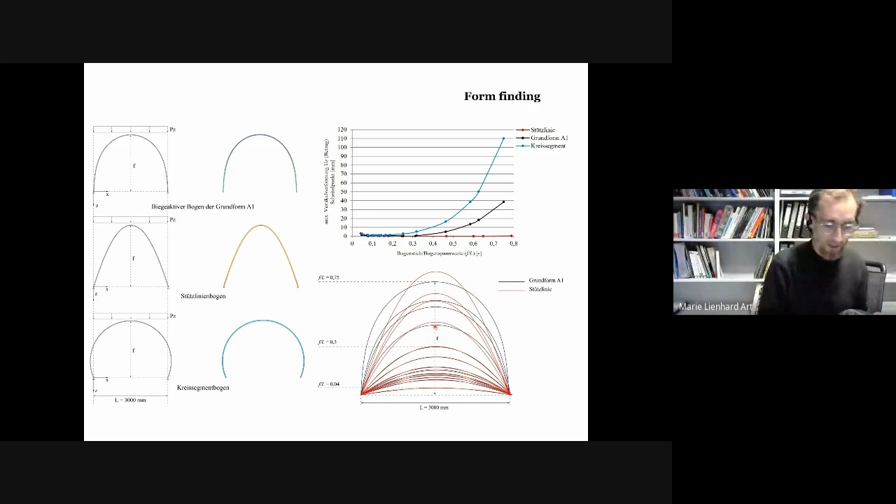They are just, don't know if you see my camera, they're just full of small hand drawings where everything that you can think of has been drawn by hand almost as one of the basic principles. And these books are so full and so resourceful that you can easily overread something like this.

And at the time when we were building the first bending active structures at the University of Stuttgart, we actually visited Otto in his atelier and talked to him. This was in 2010. And we explained to him what we wanted to do. And I was super amazed. He was basically blind. So we could only explain to him through his imagination, and we could convey to him what we were trying to do.

And then we were saying like, well, yeah, with this amazing FEM software, we can do this form finding. So we know exactly what the bending shape is. And then we actually want to build the geometries based on this bending shape. And then immediately, within seconds, he replied, oh, but you can just build a hanging chain model up to a ratio of about 30%. These curves are almost the same.

And this really, really impressed me, because I realized that this, at the time, 84-year-old man, he had built so many models and was always there and always saw what's happening, that he had this straight away in his head. And these books are full of these kind of things.

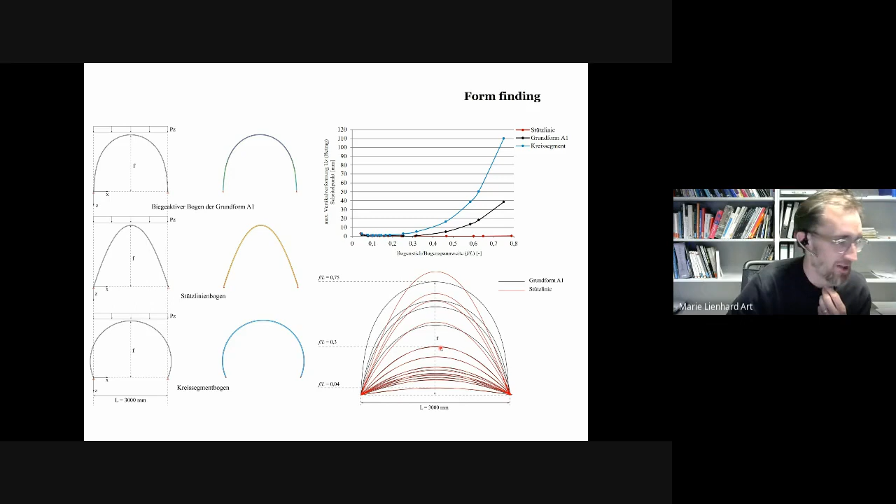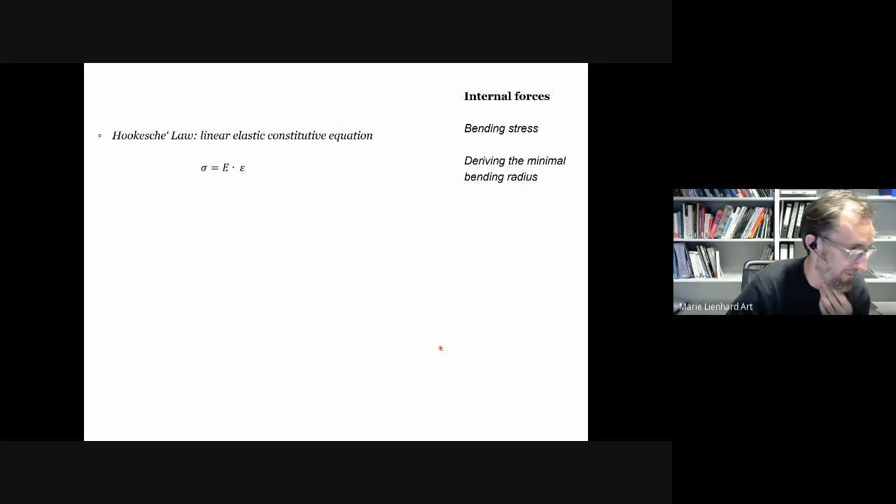That was, for me, kind of almost the most impressive moment, where I thought in my PhD, after hours of sophisticated simulation, that I found something quite interesting. And this guy just had it in his head, because they were building these models, and through these very basic understandings, they just knew what was happening.

And similarly, if you then try to find out what are the radii that I can work with, how far can I bend an element before it snaps? There's some relatively complex beam theory equations by Bernoulli or Timoshenko that can give you the relationship between elastic deformation and bending forces. And again, you can actually reduce it to a very simple formula,

which says the minimum radius is the stiffness, the Young's modulus, times the beam height over 2 times the permissible stress. So this is how much stress you're allowed to put into the material, that you can just check in a textbook for timber, steel, aluminium, glass fiber. This is how stiff it is. Again, a number from your textbook. And then you can see that there's a linear relationship between the height of your beam and the minimum radius that you can bend it into.

And again, with that very simple formula, you can then very quickly pre-dimension your elastic grid shells or whatever you want to build, find out what kind of shapes can I build with this material thickness and which ones I cannot build.

And actually, if I remember correctly, I wrote in one of my first IASS papers, this must have been around 2010, I wrote this formula into it and explained how we were building that first pavilion, which we were visiting Frei Otto for, and where I was then first doing all these numerical theories behind it. I published a paper on this and put that into it.

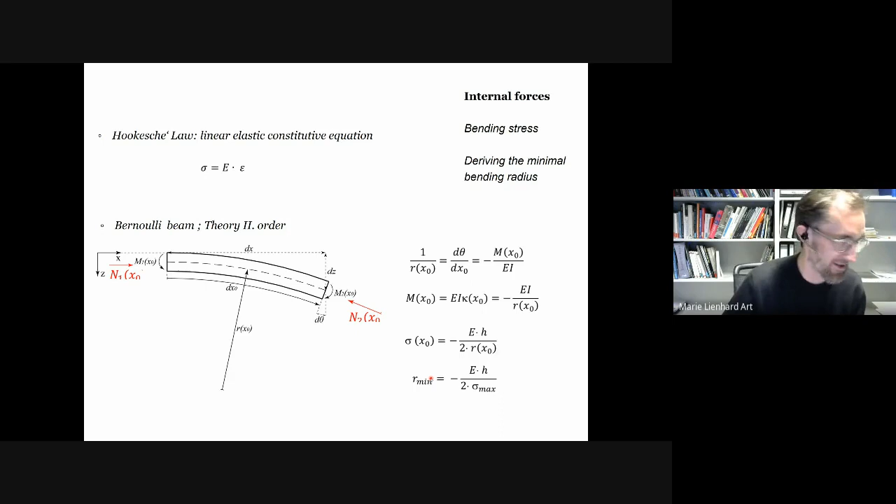And that's actually what connected us. And since then, we've been visiting each other, doing research together and talking to each other. And I think I'll stop here. I won't go into the grid shell samples themselves because I'm sure that you guys will look into that in a lot more depth yourselves.

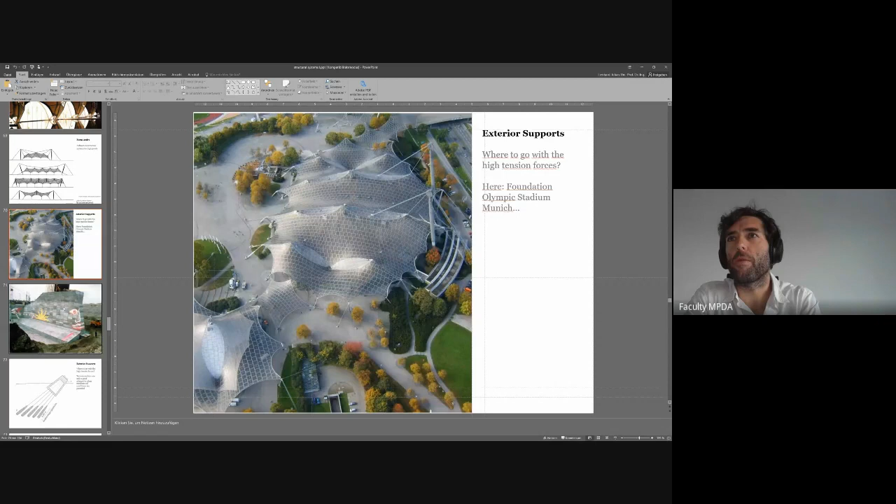All right, so this is on the side. This is actually not the mega arch. For some reason, I don't have the image in here. Looks like a model, this picture, doesn't it? Yeah, maybe it's cut and you can see more. No. So this is on the side where you have quite short spans, and then on the back here you have the large span across the stadium. Over here, you have an edge cable that spans over 250 meters.

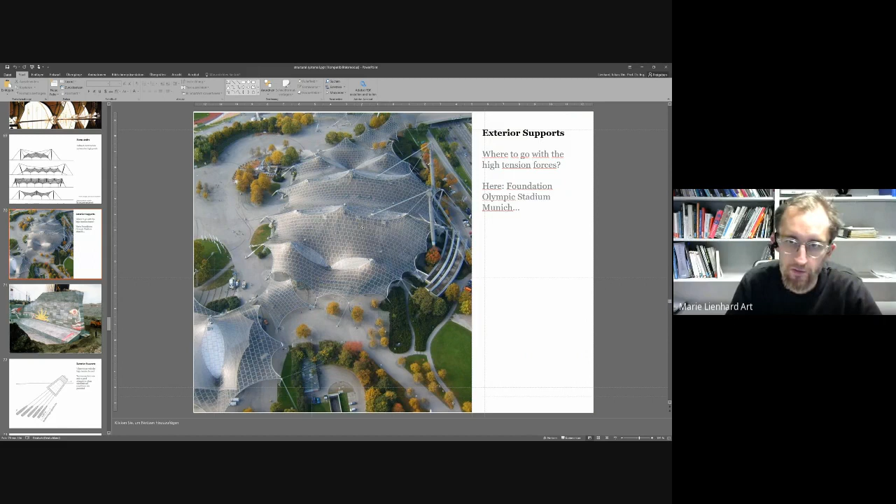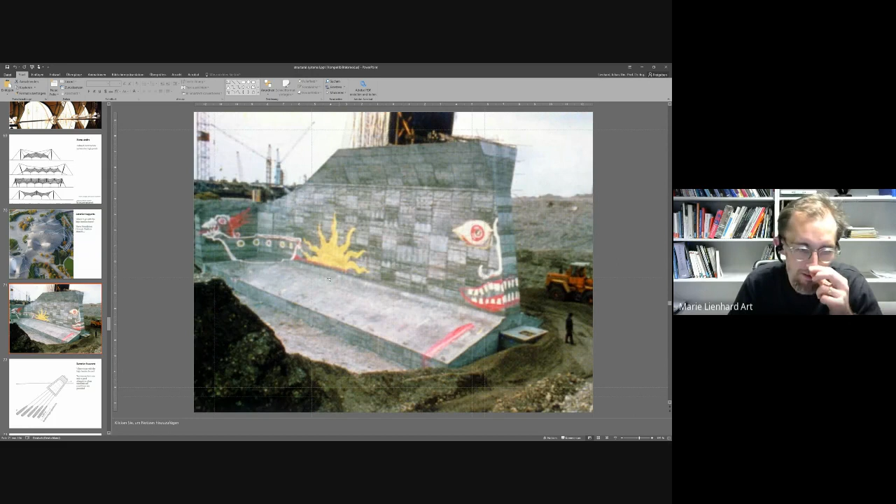I'm sure the swimming hall you could build out of timber for sure. The seats above the stadium, tough. There's an image of one of the foundation points. That's how crazy it ends up. And then this actually led to a huge development into systems where you can shortcut tension and compression, the spoked wheel principle, which eventually led to these kinds of stadium roofs where all the forces are shortcut. So none of them are anchored.

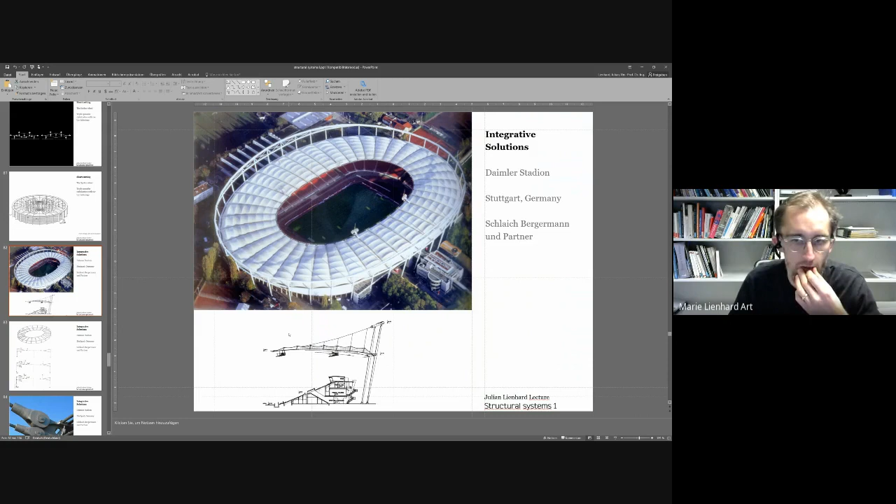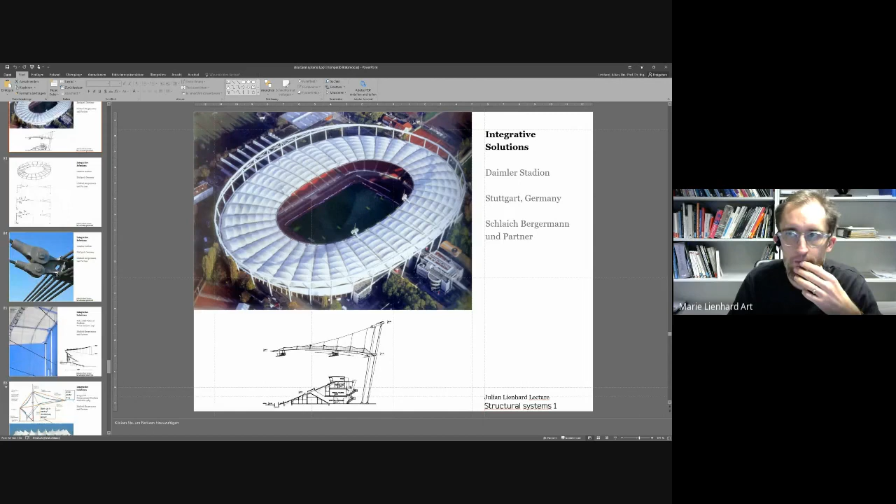And then you get these super light systems, right? This is the same as a bicycle wheel. Compression on the outer rim, tension in the inner. This is slightly inverted, pushed into an oval that leads to higher buckling loads around the edges. That's why it's doubled up here. But it's basically the principle of building a bicycle wheel. So nice.